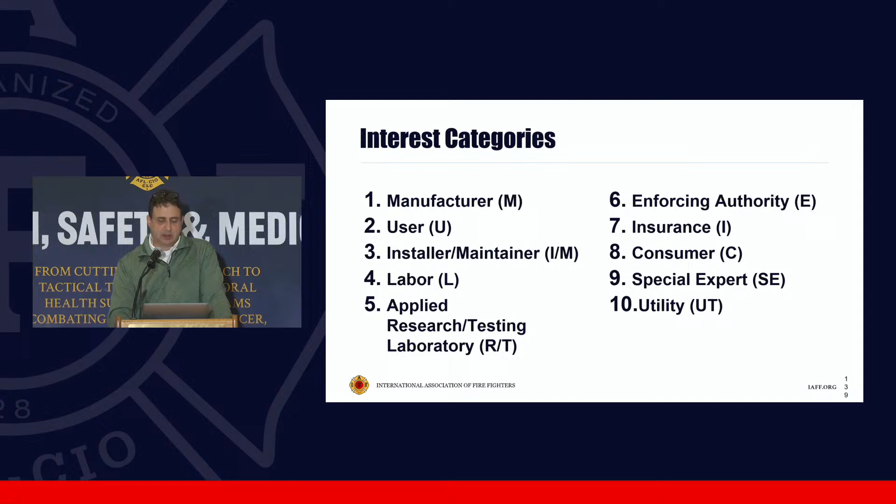So if you're applying to a committee, you probably want to look and see what interest category is underrepresented. When I got on respiratory, there were quite a few users on there, but there was only one other labor position. So I submitted as a labor spot, and I got moved up - I had to get sponsored by my local. But I was able to move up ahead of people who had submitted wanting to be on as users. So that's just something to know, and understanding that there is a wide range of interests on these committees.

When we're doing things right, when we're going through it, the NFPA process is a 4-step process: there's public input, public comment, the technical committee meeting or tech session, and then the Standards Council takes action. This is approximately a 2-year process, starting with the public input.

The public input opens up pretty soon after a standard is released, and from the public, you're able to go online and put a suggestion of what you want to see added to or changed within the standard. That's called the first draft, and development of the first draft.

The committee will have a first draft meeting roughly about 2 years before the standard's going to be issued. They're going to consider and provide responses to all public input. They may use the input to develop what's called a first revision - it's not necessarily an up or down decision. It could be that this is an interesting comment, but we think it should go this way or that way, and the committee could develop something completely new. Members of the committee may also bring new inputs not submitted as public input. So that's your last chance to get new material into the next edition.

The committee gets balloted on their first draft, and then the first draft report, after that passes, gets posted for the public to review. The public has generally about 6 months to a year to provide comment back.

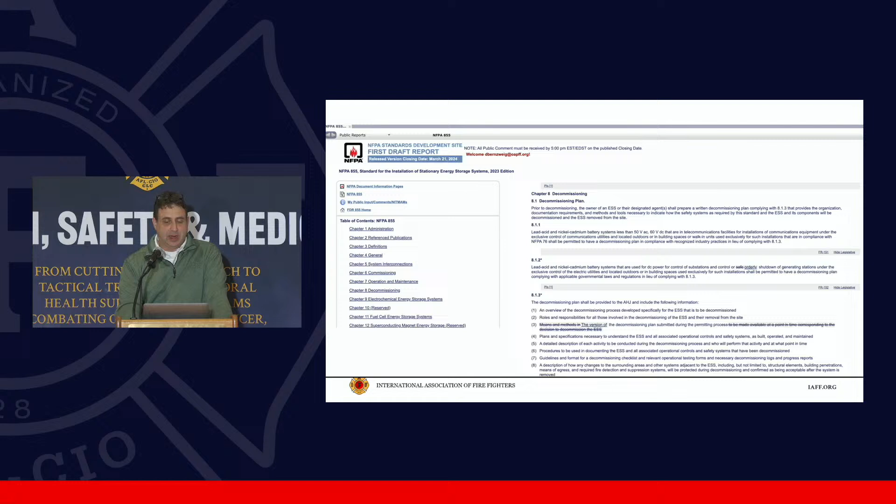And if you're doing a first revision, or a second revision, a public comment to it, either first or second, it'll open up a screen and you can type directly there. It'll show you legislatively what was added. You just click on a box and it'll open it up.

And in this case, something important to note is that in second revision, you don't actually see the changes that were made in the first revision. So this, I think, is a big shortfall of the system that NFPA has, is that you can look at the first draft and see the changes. If you're looking at second draft, it looks like the final document, so it's cleaner, but you don't see the legislative text anymore.

So you have to review the changes made in the first draft report, and then you go into the public comment and you make changes or comments there of what you want to add. When you submit it, it's going to show up in the document info page like that for you to see. This one I didn't submit, but I kind of showed you what it would look like if something's actually submitted.

Okay, and then just getting involved, right? Anybody can get involved in this process, and I strongly encourage it. You can get involved at any level. You can provide public input, you can provide public comment, you can submit what's called a temporary interim amendment. This requires the support of at least two other committee members, but you can say, hey, this is a critical safety issue that we can't wait until the next edition for.

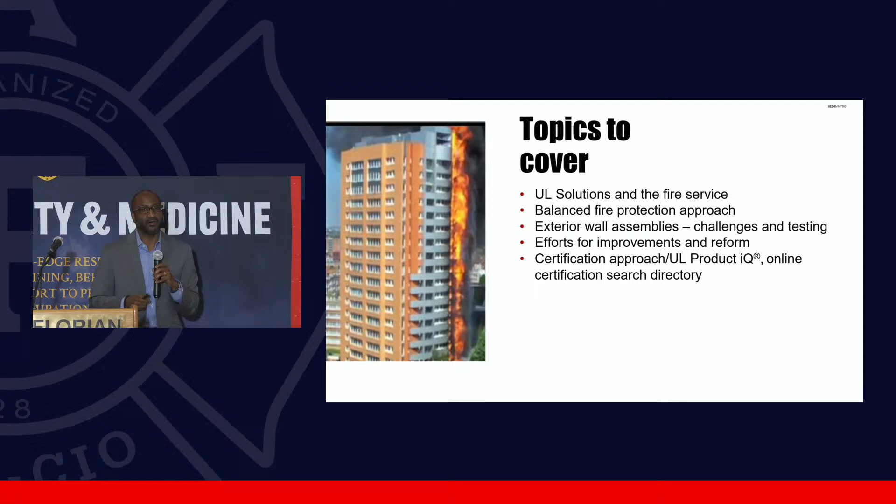Amanda earlier today talked about the certification, so we're going to go back to that and show you how you can actually see some of these products on UL's database.

But let me take you all the way back to 1894, where UL first got started. We actually got started with a very close attachment to the fire service, when William Henry Merrill was asked to investigate this rash of fires at the Columbian Exposition and to see why these fires were even happening. That's where we got our start.

With literally a few hundred dollars, he was up over the fire station in Chicago. And I'm going to say it, Flam - Sean DeCrane wants me to put Flam's picture on the wall here to simulate that he was there in 1894, but I said I would never do that to you, Flam, okay?

But yeah, so we were there in 1894. That's where you all got our start, and so it's great to be back here with the fire service.

Our original logo was this logo right here. It was a fireman's belt. That was before the UL in a circle that you know and see today. It's these Latin words, ignis servus non dominus - that's my best Latin - but it means fire is the servant and never should be the master. So that was our original motto and logo. It changed over time and became the UL with a circle around it. But it just kind of goes to show how our attachment was with the fire service.

You've also heard a lot about the three organizations. Adam Barowy was here and showed a lot of the different things they were doing on research, and you've also heard us talk about UL standards. I wanted to take a moment to share that we are three distinct organizations with three very distinct purposes, but we have one shared mission. We're all still one UL.

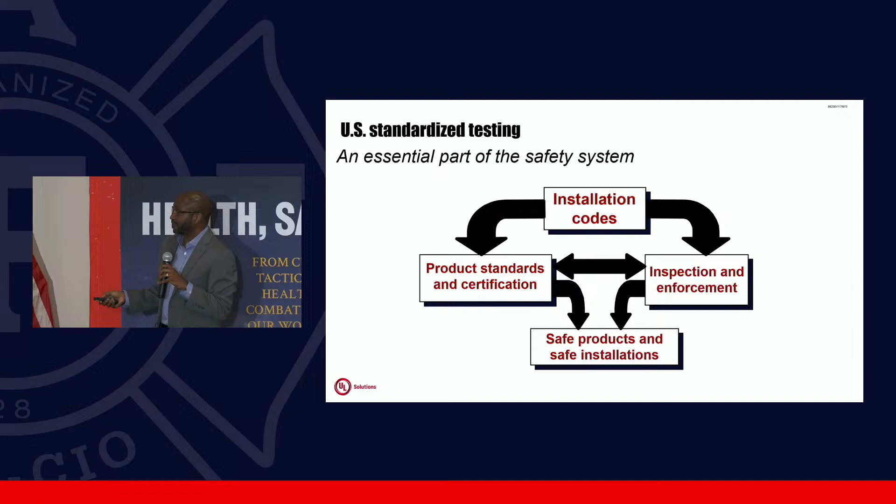When we talk about the systems, like David mentioned, the installation codes, or model codes, like the IBC International Building Code, International Fire Code, and NFPA 5000 — those are the model codes picked up by jurisdictions. But within them are the product standards and certifications, like UL standards and NFPA standards, all within those model codes. It's really important for us to get this right, because they get put into the installation codes, which are used for inspection and enforcement. That's how we get safe products in buildings — it all ties together.

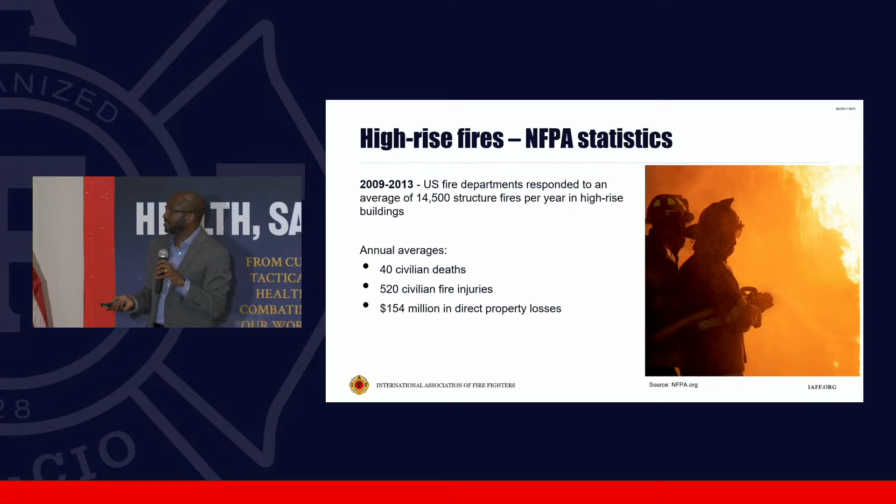When we talk about high-rise fires, one thing we see is that the stats for NFPA high-rise fires are still quite high. U.S. fire departments respond to an average of 14,500 structural fires per year in high-rise buildings. Any deaths are too high, but we still have 40 civilian deaths and 520 injuries associated with that, along with a lot of property loss. I wanted to show these stats to set the stage for why we still want to take a look at high-rise fires.

And these are the NFPA statistics relative to high-rise fires as well.

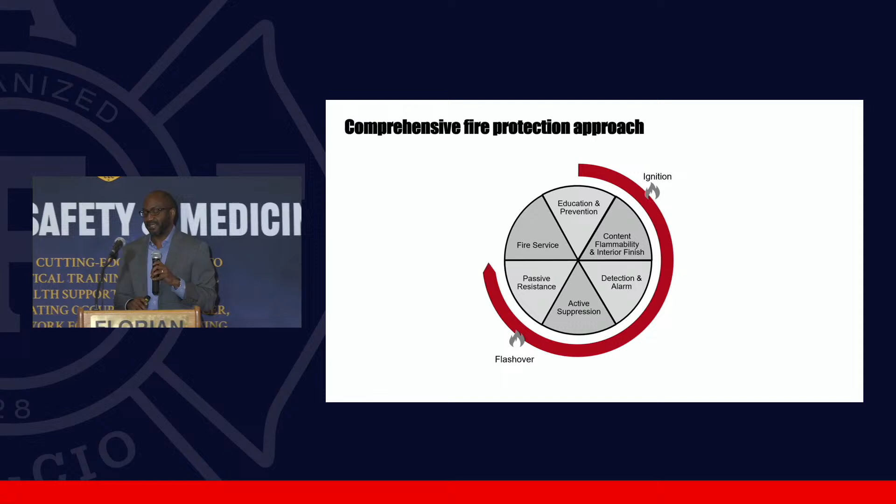We always love to look at our comprehensive fire protection approach. It's been touched on a couple of times yesterday and today — we'd love to educate and prevent fires from ever happening in the first place. As Sean says, a good day at the office is one where you never have to put the gear on and go out at all. I joke with friends that about 85% of the company at UL Solutions works with our customers to try to keep fires from ever happening, working on products in your homes so they're not a source of a fire to begin with.

But we know fires do happen — you can't keep that from happening. When fires happen, it starts from ignition, and you've got content flammability and interior finish — we call that reaction to fire. We want to keep the fire from spreading across the surface so fast that it can't be controlled. That's the first step in our fire protection world. In the lab, we test to understand that flammability aspect and how fast fire spreads across the surface of things — that's where we get into the exterior wall discussion.

We also want to detect and alarm so we can let someone know a fire is going on and get them to safety, out of harm's way. We have active suppression, where something has to activate in order to put out, extinguish, or suppress the fire — that's our active suppression area of business.

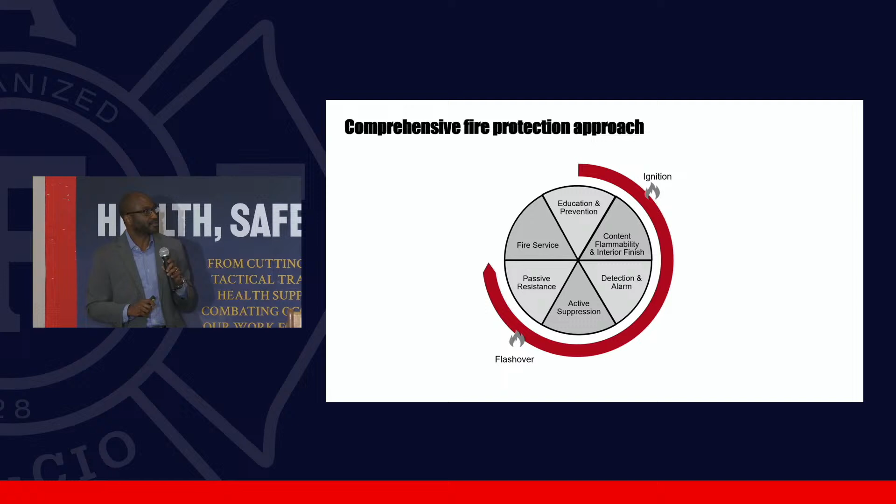But that has to be balanced with what we call passive protection — hourly rated walls, hourly rated horizontal assemblies, floor and wall assemblies, and fire stopping. All of that serves a passive purpose, so the room can sit there and you can have an area compartmentalizing the fire, keeping it in the room of origin. That's the other passive section.

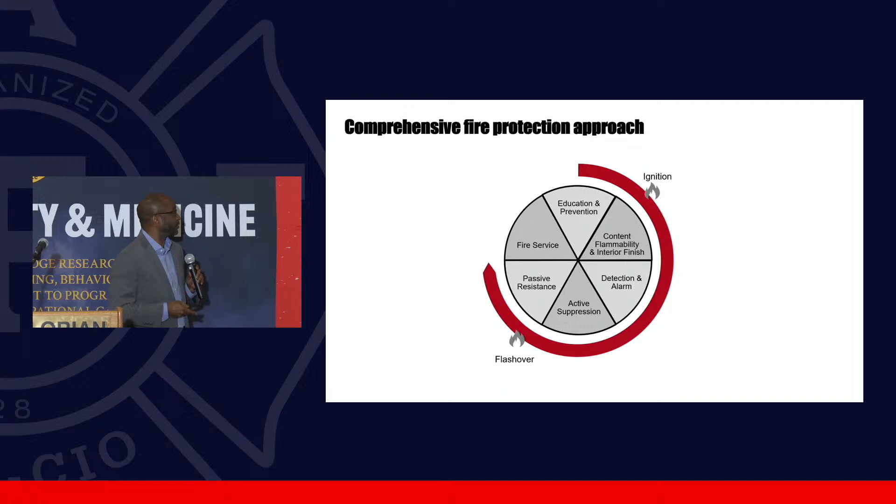And then, of course, we have our fire service, where you guys come out and deal with this. Hopefully, if all these things have worked well, your job becomes much easier. So we wanted to show you the comprehensive fire protection approach in the products that we test and list.

So with respect to exterior wall assembly, some of the challenges are, here's a lot of the different products that we see on the exterior of walls. We've got foam plastics, batt and blanket products, continuous insulation, metal composite panels like aluminum composite panels, EIFS systems, the exterior insulation finish systems. All these different things comprise the exterior wall, but one thing they have in common is that most of these materials are combustible materials.

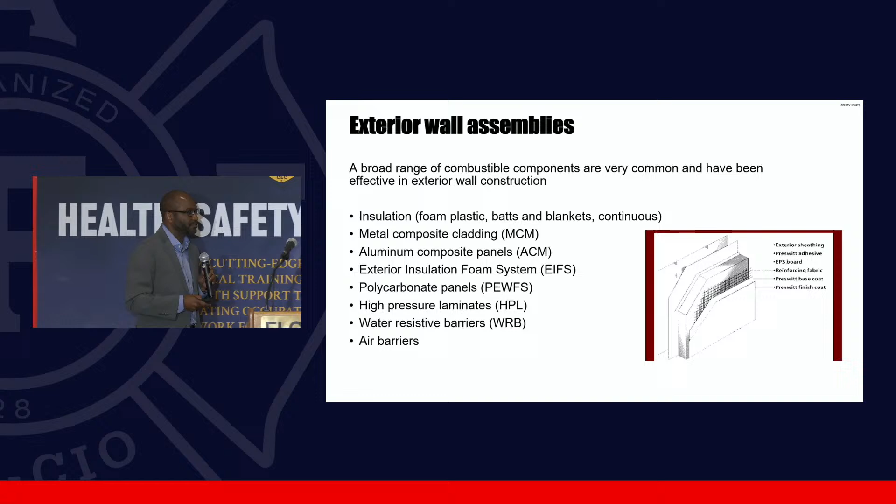And with that, you think about the area that we're in, where we want to have speed to construction, and we want to introduce new materials into the marketplace. So with this idea of introducing new products into the marketplace, there's this compounding effect of all of the various combinations that you can have for exterior wall construction.

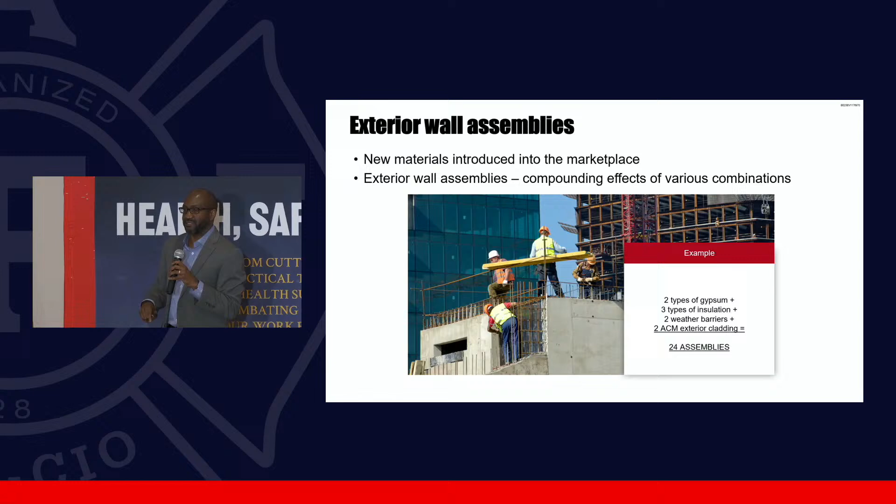So for instance, if you've got 2 types of gypsum board, 3 types of insulation, 2 different types of weather barriers, and a couple of different aluminum composite materials, you could have 24 different assemblies that would have to get tested as a combination. Because when we do this test, it's important to see that you test this as a combination, as an exterior wall full assembly. You don't just test one part of this. You don't just test the gypsum board, or the ACM by itself. You have to test it as a combination, as an assembly.

Think about how many of the codes that we just talked about, they're trying to increase the thermal resistivity of your walls in buildings. And in order to do that, a lot of times they call for higher R values. Well, with that higher R value, you have different uses and increased uses of thicknesses of insulation materials. So when that happens, a lot of times you're adding more combustibility to that wall design.

So what we find is that there's a delicate balance between the functionality of the building envelope performance - resistant to UV, no water penetration, no air penetration, and what have you - sustainable construction, and then balancing that with fire safety. So there's a lot of things happening in the code arena to strengthen building envelope performance, functionality performance, and sustainable construction. But sometimes that conversation is getting lost with the balance of the fire protection or fire safety that is also in the codes. So these manufacturers have to balance those 2 different things.

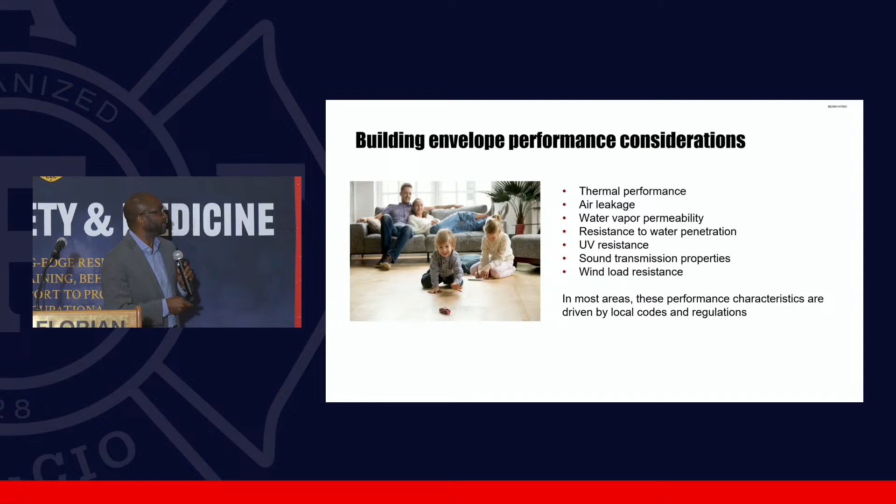An example of the building envelope performance considerations: things such as thermal performance, air leakage, water vapor permeability, resistance to water penetration. Who wants to be in a building that actually has water penetrating through? UV resistance, sound transmission, and wind load resistance. These are all the characteristics that a manufacturer of these products has to struggle with in order to meet these requirements in addition to the fire requirements.

We do testing. We actually acquired a company called Kleb up in Canada, and it's been really interesting to work with them because they have this huge jet engine that they turn on and spray water and wind against an assembly. We do what we call performance mock-up - we mock up a building and look at the moisture accumulation and things that would lead to sick buildings like mold. We control the air leakage and look at energy conservation to make sure water and air isn't getting where it doesn't need to get. They spend quite a bit of time, money, energy and resources managing their thermal, air leakage, and water infiltration. Again, that has to be balanced with fire protection.

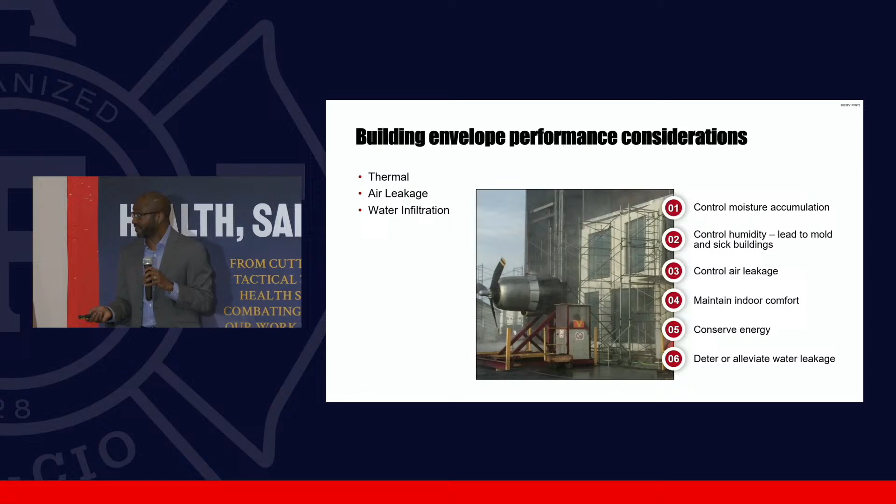We see things such as sustainable design, retrofit designs, which we're going to be talking about more today. We see building applied photovoltaics - I had many calls about what happens if I put a solar panel on the side of a building. Well, if you put a solar panel on the side of a building, that's something that can burn as well, so we want to investigate that. Once again, we talked about U factors and R values, increased insulation thickness, green facades with natural foliage - we see that of course is going to burn - and many of the decarbonization efforts happening in buildings.

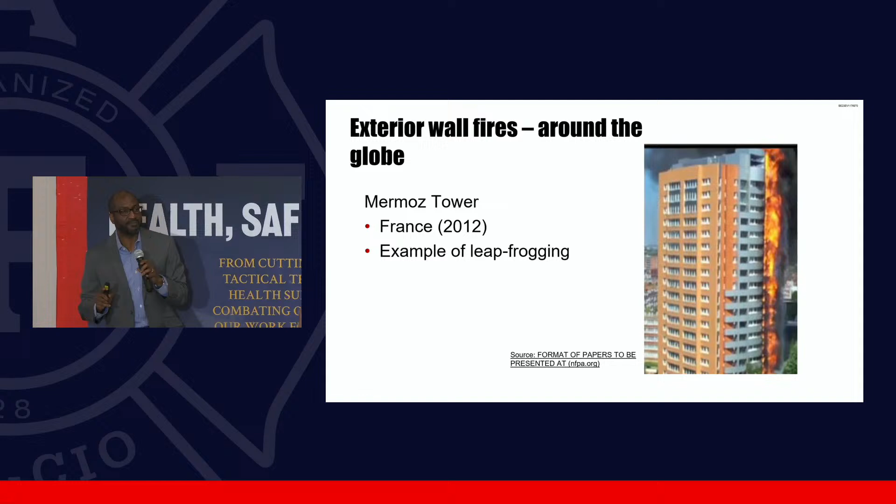So what's the problem? If you have a fire on the outside of these types of buildings, then the traditional things we know to work in the fire protection circle, that comprehensive fire protection approach, don't work on the outside of buildings. That's a problem. If you've got sprinkler systems, they're not going to work—they're on the inside of the building. That's not going to help a fire from spreading on the outside.

If you've got compartmentalization, where you have really good hourly resistive rated floors, ceilings, walls, and great fire stopping, that only works to keep the fire from moving through the building, but it doesn't help the fire from spreading up the building.

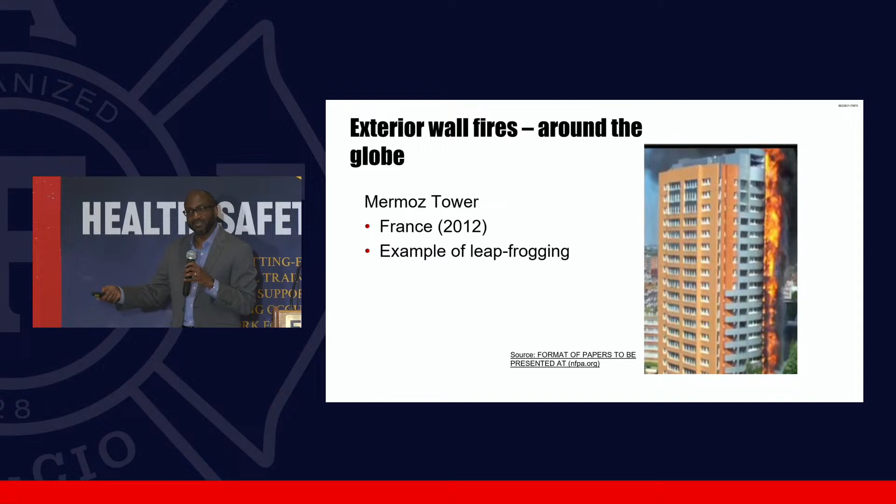So you have situations like the Mermoz Tower over in France. There's a perfect example of what we call leapfrogging, where the fire begins at the bottom floor and kind of leapfrogs up the panels. It breaks one window, goes back out, burns whatever is combustible on the outside, goes into another window, bursts outside, and gives you a straight stream to burn all the way up the building. We've seen this in many, many situations because the traditional fire protection approaches in the codes basically don't deal with these types of situations.

The Torch Tower over in Dubai burned in February of 2015. And while they were doing the retrofitting on the burn from 2015, it burned on the other side in August of 2017, and it's called the Torch Tower. So that's kind of ironic there, but yeah, it actually burned two times over in Dubai.

And then, of course, you got the Grenfell Tower, which happened in June of 2017. Many of you have heard about that because that was a loss of life with 72 people there. And it got a lot of attention to these exterior wall fires and these types of scenarios.

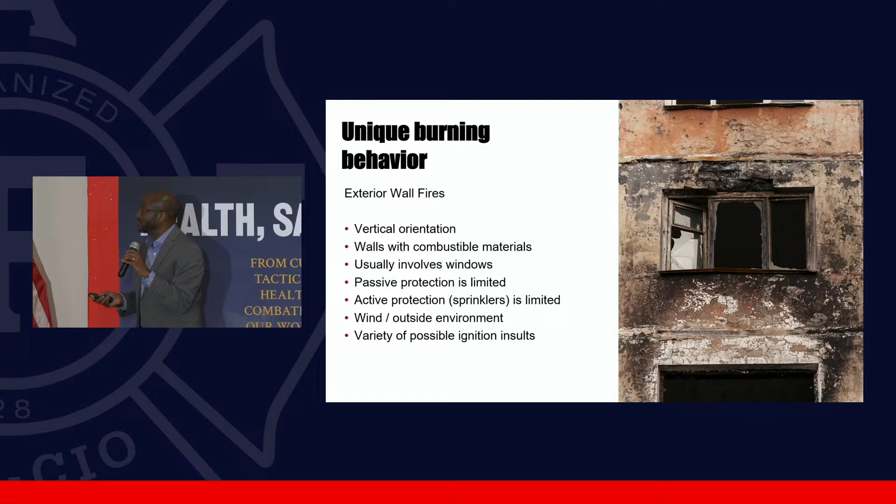If you look at the unique burning behavior of this, that's also another reason it's so hard to get under control. Of course, you've got the vertical nature of it—something that burns vertically is going to be different than something that burns horizontally. You also have all the different walls with combustible materials, all the different things that are getting used, usually involves windows, like the leapfrogging, bursting through the windows.

Passive protection is very limited in what it can do to stop this. Active protection, sprinklers, is limited. We've even had situations where they've tried to put sprinklers on the outside of the building, and you can imagine you're going to use up all of your water supply. That really has not ever worked. And in some of these situations, you've got wind that contributed to it being very difficult for the first responders to fight these fires.

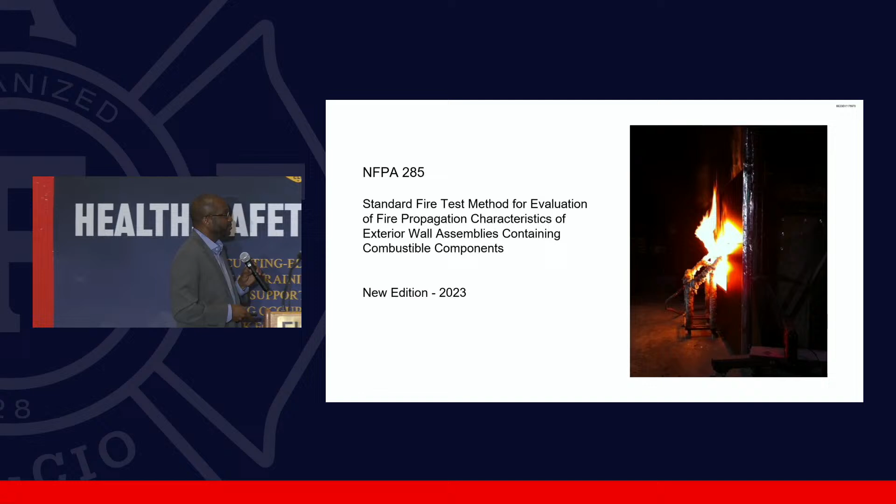So let me just pivot into the test that we do in order to deal with this type of occurrence. It's called NFPA 285. As David was saying, it's one of the many NFPA standards. I'm on the fire test committee for NFPA 285. We're now on the 2023 version of this standard. We recently went into the standard and put an annex in there to help us with engineering judgments and the judgments that can be made on the testing associated with this.

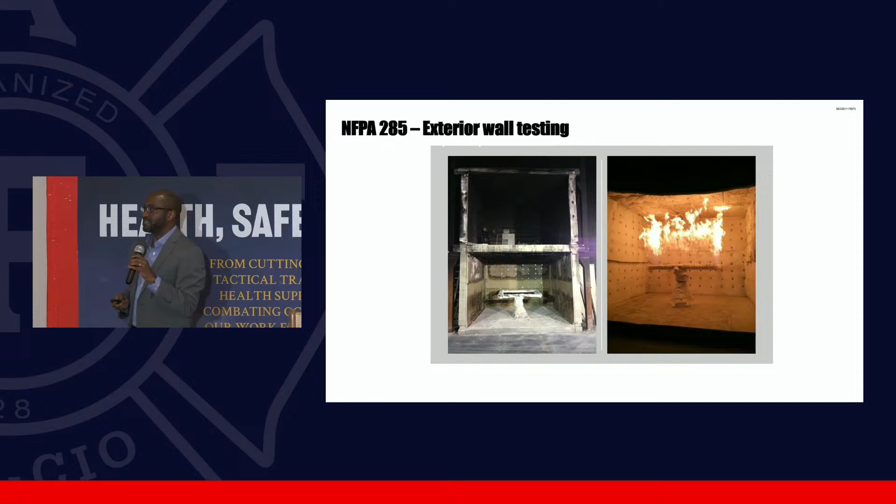We call it a multi-story intermediate test apparatus. It's a two-story apparatus. There's a burner on the first floor, and we ignite that burner, and it impinges on the inside of the wall assembly. We build the whole wall assembly in a frame and roll that wall assembly up to this two-story furnace chamber. Then at 5 minutes into the test, we roll up a window burner. You can see the window burner here, and we ignite that at 5 minutes into the 30-minute test.

Once the wall is put there—this is a masonry wall we're testing with all of its combustible materials behind it—you can kind of see here that we don't want it to go up the wall by 10 feet and not over by 5 feet from the center line of the burner. So you've got 10 feet up the wall and 5 feet either way from the center line of the burner, and that's the pass-fail criteria.

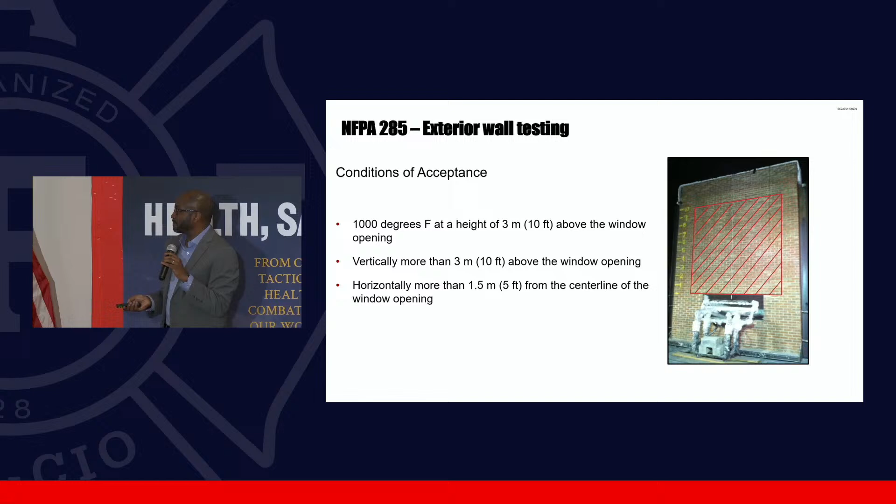So let's take a look at a test. We were able to work with a customer to bring in an assembly where the only change was the aluminum composite material and how it was constructed—whether that ACM was made with polyethylene in it or whether it had a limited combustible core. The inside of the wall was gypsum board, basically non-combustible continuous sheathing, and we did have a weather-resistive barrier in this one, and airspace. Again, the only real combustible component here was the ACM, the aluminum composite panel.

Usually we don't get to see this because, of course, manufacturers don't want to pay for tests that actually fail, right? So we were able to work with the manufacturer—we expected this would be a failure. At 5 minutes, we rolled up the window burner. You can see us igniting that window burner at 5 minutes, and you can see the ACM, the aluminum composite material, beginning to melt at about 6 minutes.

We had mineral wool on this one and gypsum board, and just a very small weather barrier and an airspace, so nothing else really to burn but the ACM. At about 9 minutes into the test, we started seeing things dripping from the ACM. We saw that the ACM outer skin was beginning to open up, and right at about 14 minutes into the test, we had already well exceeded the 10-foot requirement, and we were at the point where we had to put this thing out.

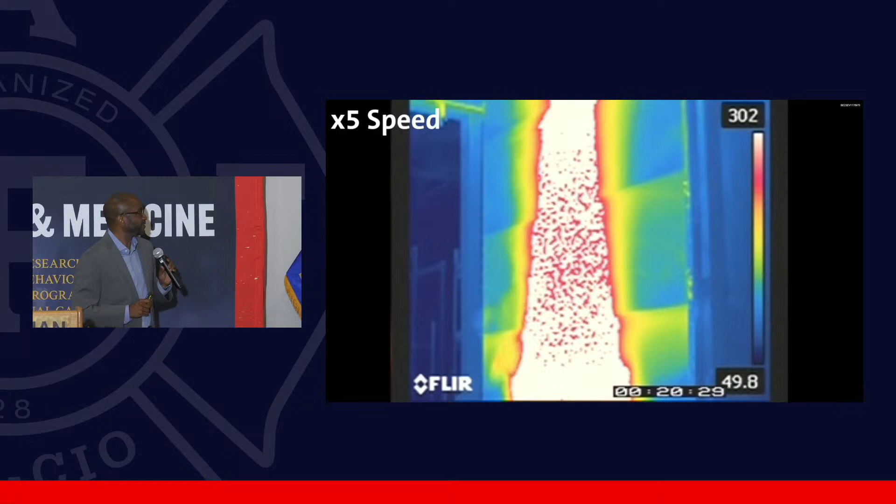Once we opened up the core, we didn't see the propagation of flames. Here we are at 20-something minutes into the test. It's starting to work its way up the wall, but it didn't actually exceed the 10-foot level. So here you go, 30 minutes into the test, this is what we would see as a passing test. Yes, it did open up, it has that triangular shaped flame pattern, but it didn't go to the 10-foot level.

We'll share some important things about this particular test. We actually did this test twice. The first time we did this test, the one that was supposed to pass actually failed. I called Sean up, I was like, oh my gosh, what's happening here? And it was a workmanship issue. They actually put this together, but even in a laboratory type of condition, realizing we were going to do it for this purpose, the workmanship problem actually caused this to fail the first time, and they came back and did it, quote unquote, right. But it just goes to show that even in a laboratory condition, just something as simple as a mistake in workmanship actually made the difference between a pass or a fail on this test.

So this test, you can actually see it on the IAFF site as well as on YouTube. You can take a look at the whole deal, it actually shows it in greater detail. I certainly invite you guys to take a look, just plug in NFPA 285 on YouTube, and you'll see us there, myself and Sean, going through this work that IAFF was able to sponsor for us.

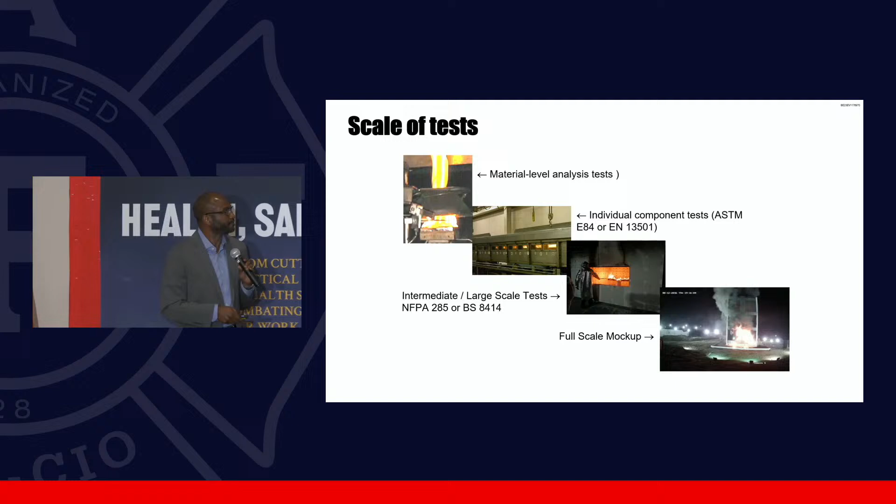So let's go back to our question. For the Dubai fire at the address, I asked the question: do we think that ACM panel was rated or not? By a show of hands, how many people think that ACM panel had a rating on it? How many people think it wasn't rated, that it did not have a fire rating? Got a couple hands, okay. So the answer is that panel actually had a fire rating.

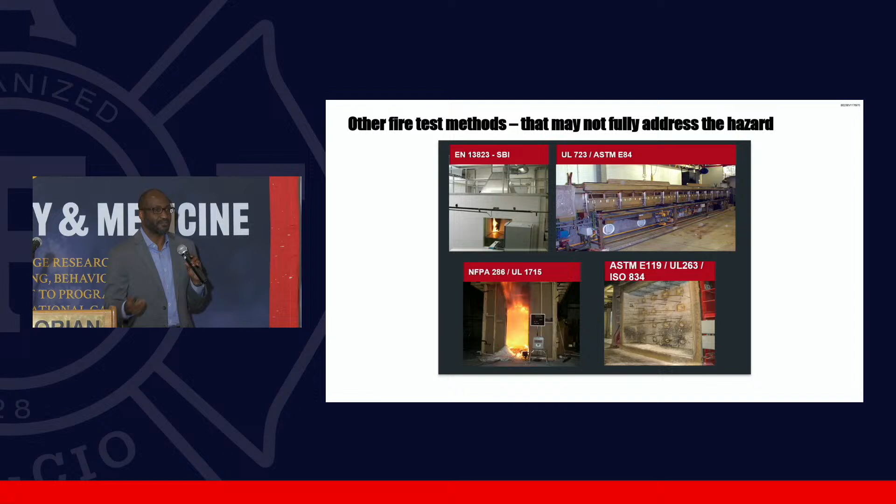The ACM product had a fire rating, and here's what it had: an ASTM E119 fire rating, and this has everything to do with your hourly resistive rated walls. So imagine putting two layers of gypsum board and some other things together, and putting ACM panels on the outside. This is an interior wall. This subjects the product from the interior side, and as long as you don't exceed a temperature requirement on the other side, you can pass.

So the ACM had been used in a compliant fire resistive wall assembly. It got like a 1 hour or 2 hour rating, but unfortunately that was not the right test to do. This NFPA 285 test basically subjects the wall to an exterior flame and watches the flame go up the outside - that was the proper test. So it goes to show you that a product can have a fire rating, but it needs to be the right fire rating. This product did have a fire rating, but not necessarily from the right test.

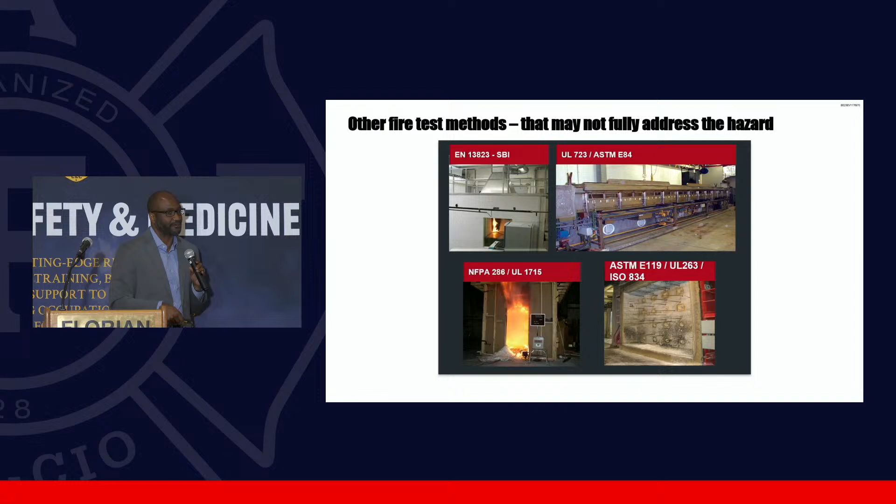Other tests that kind of get confused: we have a single burning item test used in Europe, ASTM E84, UL 723 with the Steiner tunnel. Sometimes that gets confused with a fire test because you do get a fire rating out of it. There's something called a room corner test that sometimes gets a fire rating too. But again, I just want to drive the point home that you have to have the right test in order to do that.

That would be like a whole half-hour discussion, but George is asking: is the UK test more restrictive or more severe than the NFPA 285 test based upon the fire source? The answer is that one way to look at it is yes, the actual fire source itself has a higher energy. But there are some other details in that test that are less severe than NFPA 285, so it's a bit of a balance.

You can't necessarily just look at the fire source because, for instance, on this particular test you're not exposing the interior - you're actually building on top of an assembly, and then the fire just comes out of a hole. We've actually gone into a deeper dive on a lot of these to show that while even the fire source might be different, there are parts of NFPA 285 with how you instrument it that actually make it more severe as well.

My understanding is that the Grenfell situation - it should have been tested to this standard, and that's what the Grenfell inquiry was all about: doing a deep dive to determine whether those products that actually got installed on the building were or were not actually tested per the reports. All of that information is in the Grenfell inquiry. Very good, good question, thank you for that.

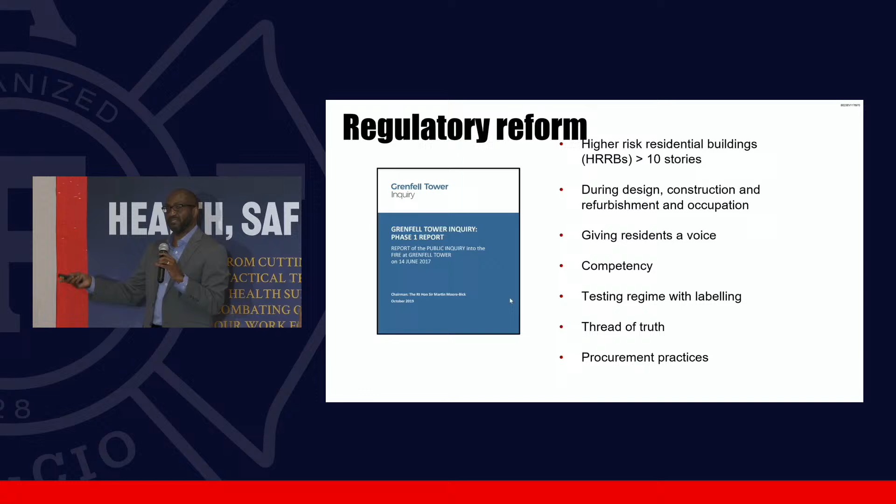I wouldn't want to finish this up unless I talked about the fire blocking in New York City. New York City has some newer rules that say even though you might have an NFPA 285 compliant design, they want to see fire blocking at certain intervals. That has already gone into play. The whole idea is to deter this leapfrogging that we saw earlier. So even if you have an NFPA 285 compliant design, NYC has now made regulations and laws to say that you actually have to have fire blocking installed.

So how do I know whether or not something has been evaluated to one of these standards, especially like NFPA 285? Well, we use our third-party certification. Rather than just do the test and give that sponsor a report that they have to show around to people, we constructed a certification program that allows you to actually see these assemblies as they're all put together. It's on something called Product IQ, and that goes for PPE gear, anything that would have a listing mark on it.

It's accessible all the time. You just go in there, put your name in there, it will remember you, and for anybody in this room, you'll actually be able to get the enhanced versions of Product IQ because of your role as a first responder. So just pop in there and put a keyword into the search field. If you put in NFPA 285 or what have you, it's going to pull up our categories for exterior wall systems and exterior wall system components.

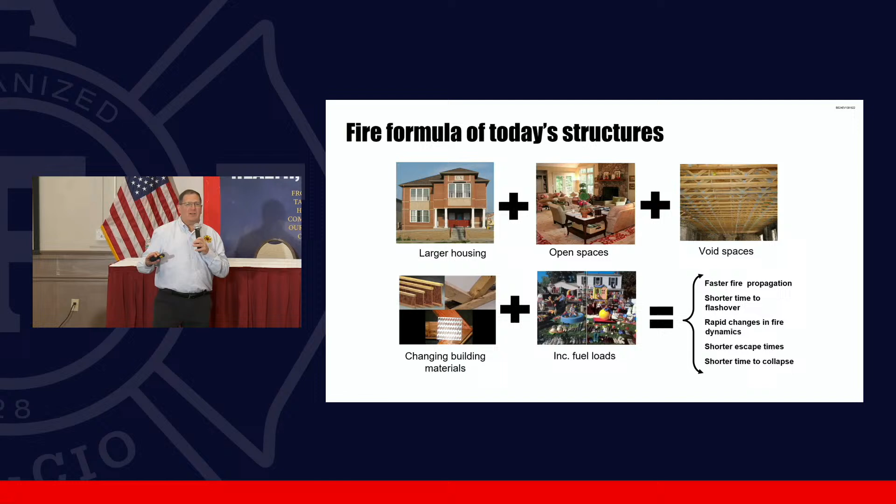So there's not a solid wall on that first floor. It's wide open, right, for that social aspect. We want people to be able to engage each other. But what that does is it creates openings, that open air, that access to oxygen. We lose that natural compartmentation we had in our residential homes.

We see the void spaces, especially with truss construction. Instead of having that inherent fire barrier above the ceiling area with the 2x12s or the 2x10s, now we have that wide open air. The fire can propagate across the floor.

And then we see, as I just mentioned, the truss construction. We see the changing materials, the engineered I-joists. We're seeing plastic components come to the marketplace. And I referenced it earlier, changing the residential code to require engineered floor systems to be protected with half-inch gypsum board. We were successful in doing that in 2012, but it took the life of Arnie Wolff from Green Bay, Wisconsin, and the research from UL and FSRI. And then the increased fuel loads.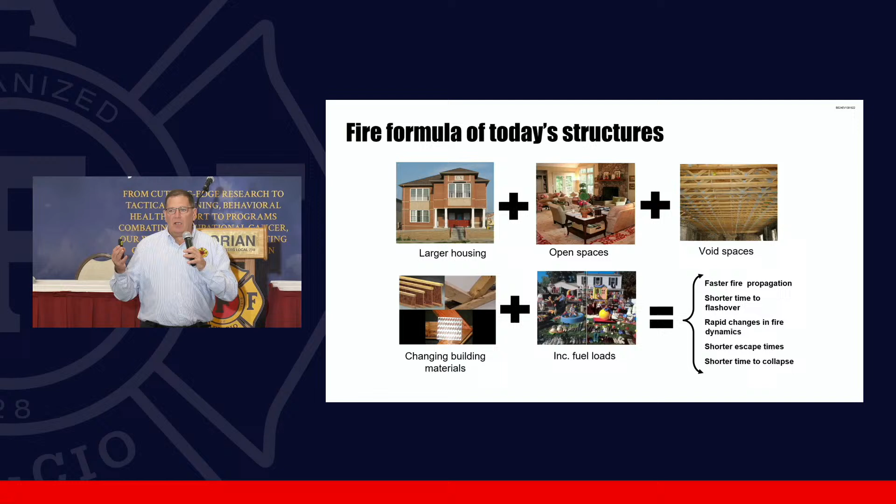So when you look at that picture there, that's actually out of a National Geographic from 1997. What they did is they asked a family to bring all of the plastics out of their home and put it in the front yard. A sales rep from Step 2 will be driving by looking at market share, right? We're looking at the fuel load. That's all petroleum-based products. And if you think about the synthetics of today's couches, the chairs, the furniture, we're just seeing that petroleum enter into the marketplace.

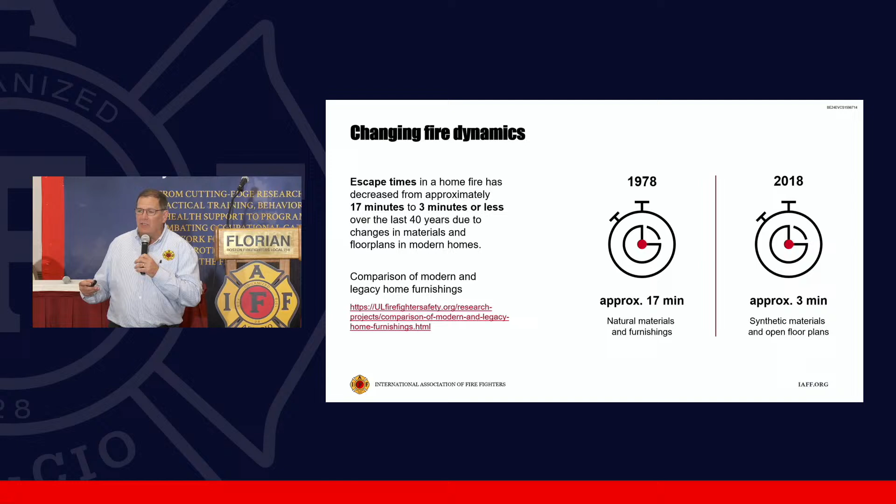And what impact does that have on our occupants? Back in the 1980s, the National Institute of Standards and Technology's predecessor did a study called the Dunes study, looking at the performance of smoke alarms and the time to escape, going back to the 70s. What they had calculated at that time is that when the smoke alarm activated, the occupant had approximately 17 minutes to effect egress before conditions became untenable.

In the 2000s, NIST went and replicated that study. The only thing they changed was the furniture. And that 17 minutes for egress time is now approximately 3 minutes. A lot of that depends on ventilation and the amount of air that's available.

And we look at the comparisons here. You may have seen this previously. Oh, I thought this went up to full screen - it does not. But on the left, you see that natural room. That is your solid wood framing, your natural fibers, your natural fabric covering the furniture. In fact, when this furniture started to wear down, what did Grandma do? Went and got it reupholstered, right? But it didn't wear down because she usually had that plastic covering over it, but we didn't cover it here.

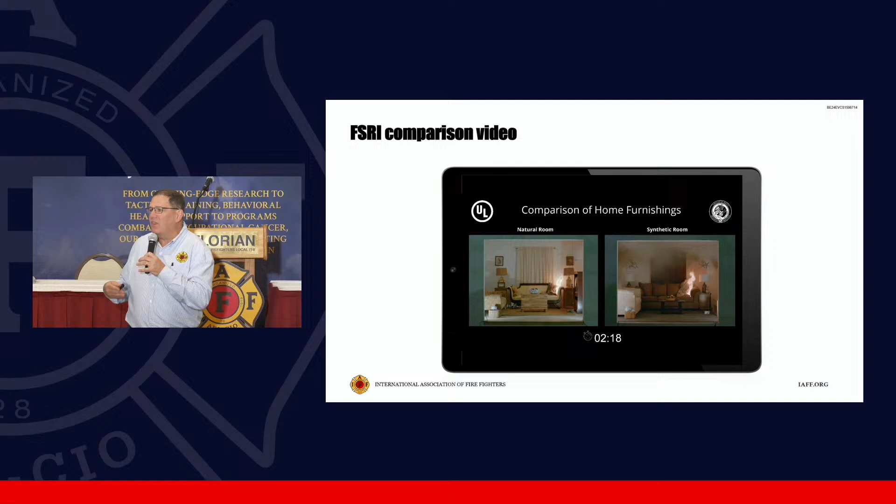So on the right, we have more modern furniture. It's synthetic-based furniture - polyurethane foam, pressboard construction on the framing, and synthetic coverings. This also has flame retardants in it, because we bought it off the shelf. So you see the difference.

At first, you had kind of an open flame on that natural fiber, but that was because it was fully consuming that fiber as it's going. But once that fire gets going on the right, it's hard to see there, but what's the main byproduct that it's producing? Smoke, thick black smoke, because it's not perfect combustion. Incomplete combustion creates carbon monoxide, carbon dioxide.

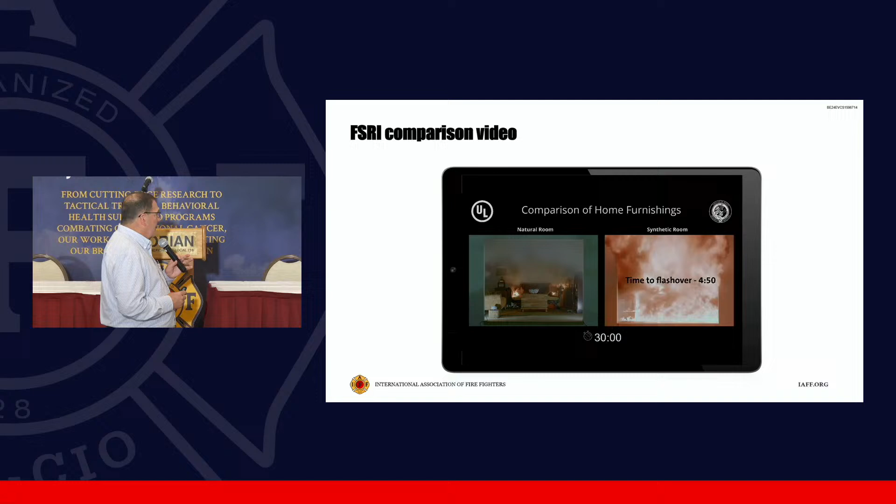Now we see that it's preheating, and now we transition to flashover. Depending on the opening of that room, we can see flashover from 4 to 5 minutes or later, depending on controlling the airflow. On that left, natural fiber room, sometimes depending on that ventilation opening, if it's wider, it may not flash at all because all of the heat is able to dissipate.

And if you think about the construction of that typical residential occupancy now, on that first floor, wide open, unprotected stairs to the second floor - that means if an occupant has any delay in responding to that smoke alarm, and is not out of the house when our members arrive, it now becomes a life safety issue, it becomes a rescue. So it puts our members at greater risk as well. This is a firefighter safety issue as well as an occupant safety issue.

And we've seen some modifications that really enhance what we were trying to do from a fire service perspective. You look at UL 217 and 268, that's the smoke alarm and smoke detector standards. We're incorporating through the NFPA 72 standard the requirement to reduce cooking nuisance alarms, identifying wanted cooking versus unwanted cooking. So really a lot of research went into that.

And also we've seen the introduction to the emergency communication systems, and we got this into the codes. Bob was very instrumental in that after 9/11. With the failures of our communication systems there, I still think it's one of the most important advances. The code now requires that our communication systems work effectively in 95% of that structure. And now we have the code requirements to go in there and require the building owners to update their system. Joe Brooks here from Boston has used that very, very effectively in the Boston area to ensure that communications are operational, especially in high-rise buildings.

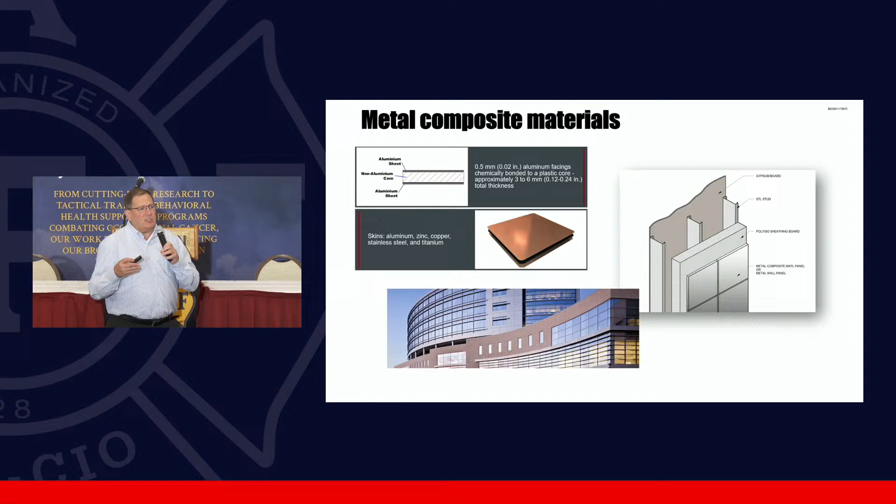But it's also the importance of standards, and test standards. Dwayne covered the NFPA 285, looking at preventing the fire propagation from an interior fire reaching that exterior wall and then propagating up the side of the structure. So Dwayne kind of went over what those ACM panels are. Really, I just wanted to give a sample of it here. You kind of look at it there.

The important thing is that sometimes people are lulled into a false sense of security. They see those two panels of metal and they go, this is non-combustible, this isn't going to catch fire, the fire is not going to propagate. But what's the problem with that theory? They're not counting on the penetration or the failure of that seal around that panel. And if that panel is containing a combustible plastic, as it starts to melt, as it starts to come out from between those two panels, it becomes a fuel load. And it becomes a very effective fuel load at communicating up the side of the structure.

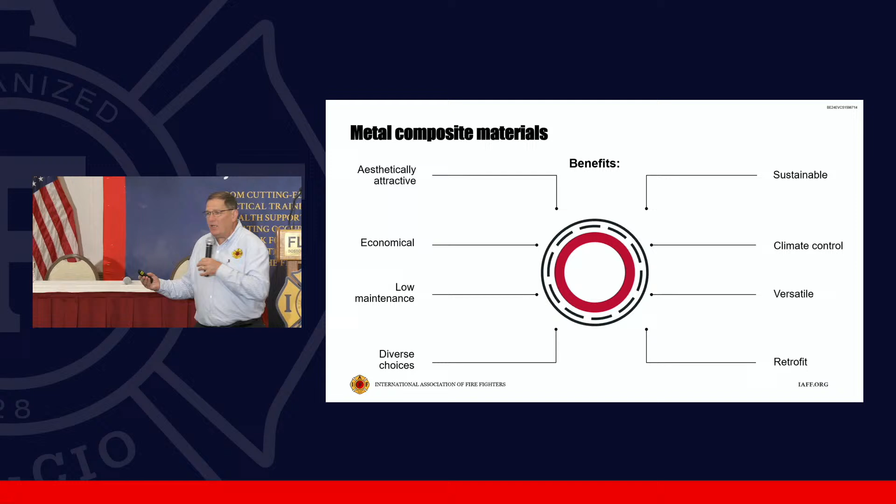And so industry, and we find this a lot, industry has their focus, and I'm not trying to make them a bad guy, but they have their desires to bring aesthetics to it. We have designers out there, architects that are designing beautiful structures. Now industry wants to meet the challenges of meeting that aesthetic look. They want to be economical, so they win the bid. They want to be low maintenance, especially if you're a high-rise building. How many times do you want to put a crew on the outside repairing it or cleaning it? They want the diversity of choice. We don't want every building to look the same. We need individuality, we need sustainability. We want to meet the energy performances, climate control, cooling in the summer, heating in the winter, and versatility, and also the important retrofit, just like Grenfell was, just like a number of buildings have been.

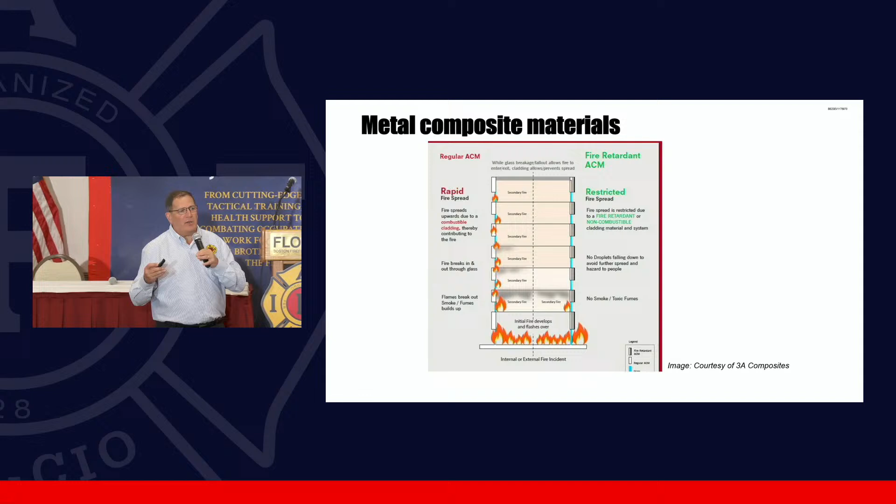What's the one component that they're not thinking about here? Fire, right? And we see this in the residential, and Kelly's going to get into the testing that we did in the residential looking at this, because this is what DOE did not do. They were looking at the energy performance, but they were not looking at the fire risk. And so if you look at a regular ACM panel, it may have a polyiso foam or a polyurethane foam, the risk of fire propagation is increased exponentially versus, I know it says fire retardant, but it doesn't have to include fire retardants. It can be a non-combustible interior of that panel, but really what it's there to do is designed to limit the spread of fire.

So since we're talking about combustible exteriors, let me go there. Tall timber buildings. So this is an issue that we were addressing. I was put on an ad hoc committee through the International Code Council. The American Wood Council had introduced code change proposals trying to increase the permittable height and area of a type 4 structure, heavy timber. They wanted to go from 6 stories to 9 stories.

We're at the late stages of the code change development process when the fire service was like, hey, wait a minute, what are you trying to accomplish? And their sole argument is, we're going to reduce the impact of wildfires by putting up taller wood structures. But they had no justification, they had no data to demonstrate that they could do this effectively or safely. So they established an ad hoc committee. Long story short, we got together, did some fire testing.

A lot of people were trying to push for 40 stories. The fire service, because of our involvement, we are now limited to 18 stories, but this isn't necessarily accurate because the book wasn't even printed, and Milwaukee already has built a 26-story wood structure. So that's a whole different presentation.

But Grenfell happened during our deliberations, and one of the most important aspects that came out of that was that as the committee went forward, we put forward changes that would not permit any combustible materials on the exterior facade above 40 feet in a mass timber structure.

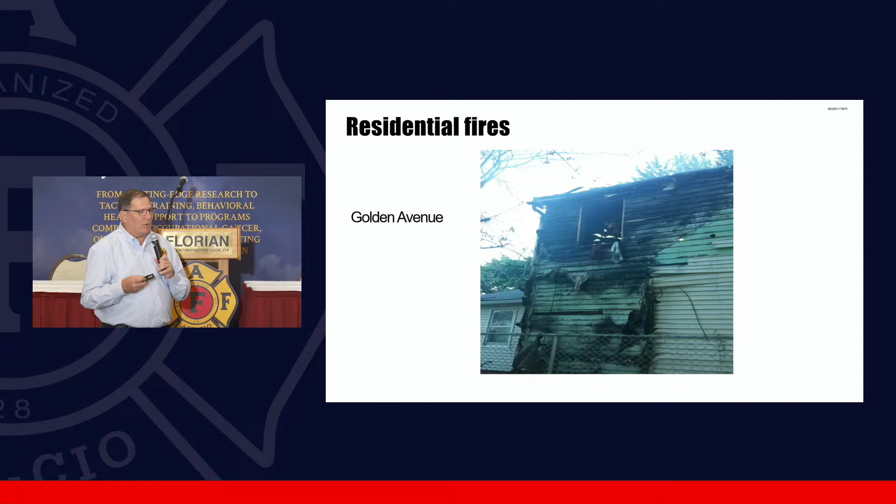And the only reason this fire did not propagate to the house next door is because the house next door was already gone, right? So that's how quickly that fire propagated up and down that house. So these fires do have consequences, and we do need to be cognizant of it, because as Kelly's going to get into, it's...

When we start to retrofit, we're not only looking at retrofitting that house, we have to look at the impact at surrounding structures. And this is a house that's in Brunswick, Ohio, or apartment building in Brunswick, Ohio. And this is about 15 miles outside of Cleveland.

And this fire started on the exterior, went up the side of the structure. Mother and father got out of the apartment, but apparently forgot their 2-year-old inside the apartment. The 2-year-old did not make it.

When the assistant chief arrived on scene, he was interviewed by the media, and he made a comment. He goes, the fire raced up the side of the building like it was on gasoline. The next day, he got a phone call from an industry rep that just said, Chief, you should watch what you say in the media. It could get you sued.

They never asked how the family was doing. They never asked how his firefighters were doing. They never asked how the community was doing. They were worried about a comment made about their product. So these are the challenges that we have sometimes.

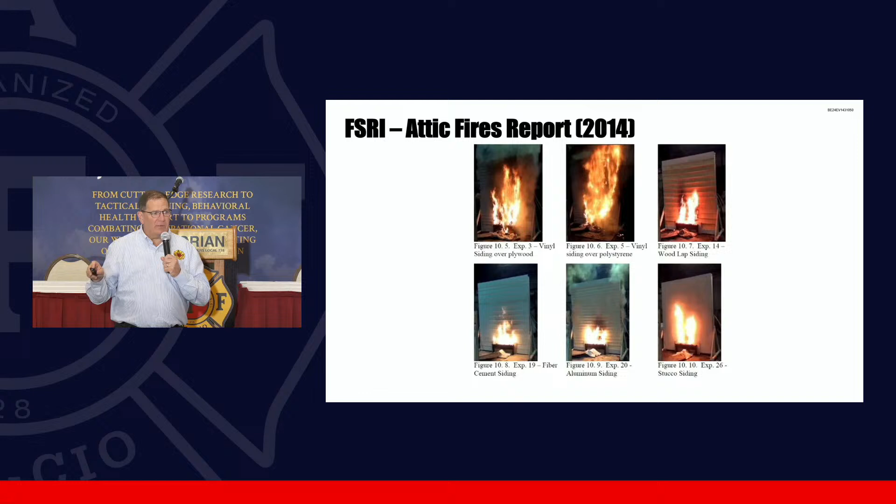The important thing out of this project that we have to take forward is that it's great to have that attic fire, and we all do it. We get that moth to the flame, right? Get through the door, get up the stairs, start getting water on that attic. We also have to be cognizant of that exterior fire that's pushing it. We've lost firefighters recently in Tennessee because they did not address the exterior fire that was driving the interior fire down on them.

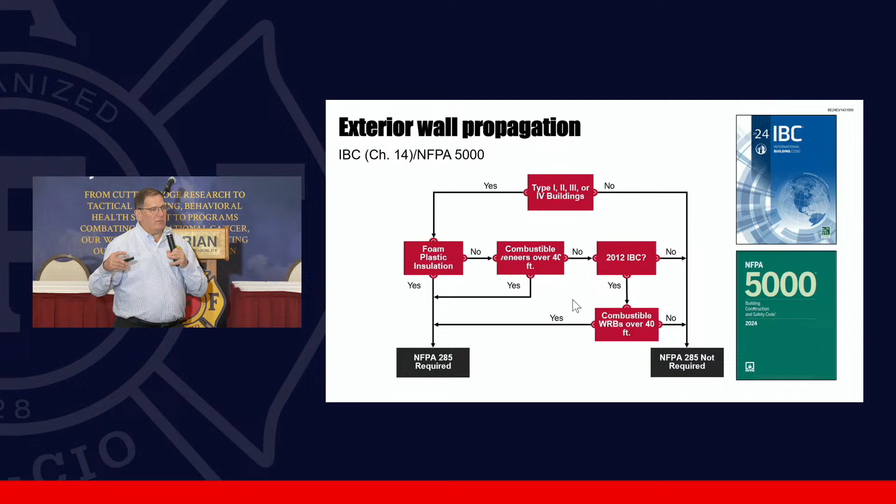What we're looking at here with this project are buildings that are not subjected to NFPA 285 testing. Just in the scope of NFPA 285, you see that type 1, 2, 3, or 4. You don't see type 5 involved. If you go through the whole flow chart, you can see buildings over 40 feet have an NFPA 285 requirement. But residential, type 5, 3 stories, are not subjected to NFPA 285. So if companies or building owners want to retrofit their building to make it more energy efficient, they don't have to do any fire testing to evaluate the performance of that exterior system.

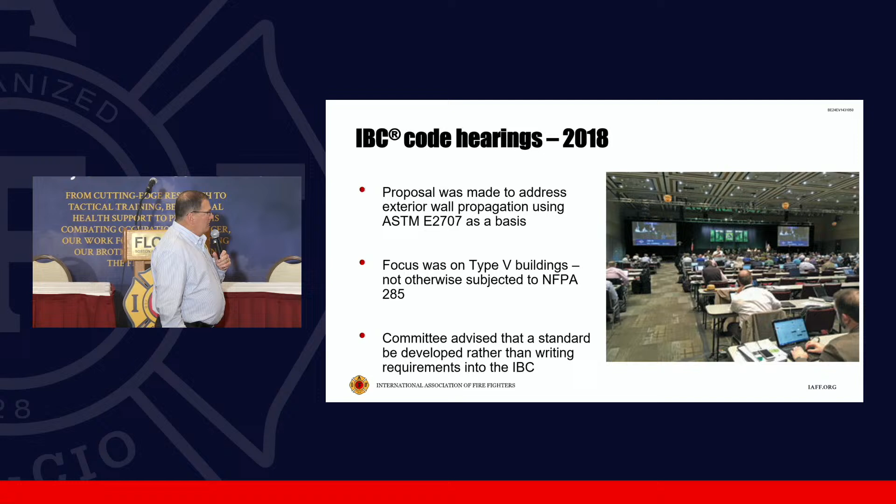So what kind of drove this after that 2014 project - there were some in the industry that wanted to change that. They were trying to take the test and accompany it with ASTM 2707 and write a test standard right there in the code world, which is not a very good or pretty process, and usually not a very successful one. But it really started things going. There's a picture from an ICC meeting - I think that day they were giving away free beer, because usually you don't have that many people in the room. But really what this brought up is the need to start addressing this from a test standard development.

What is the ASTM 2707? Well, it's a wall penetration test. I don't think Wayne talked about it at all, but really it's evaluating the fire penetrating through that exterior wall. So we were saying, can we take this and modify it? Can we put it into a fire propagation test? There was an industry that came to UL and started to do some research - could they develop this? They have a non-combustible product, also an insulation product that can go on the exterior walls, and they wanted to see if we could develop a test standard applicable to those residential walls.

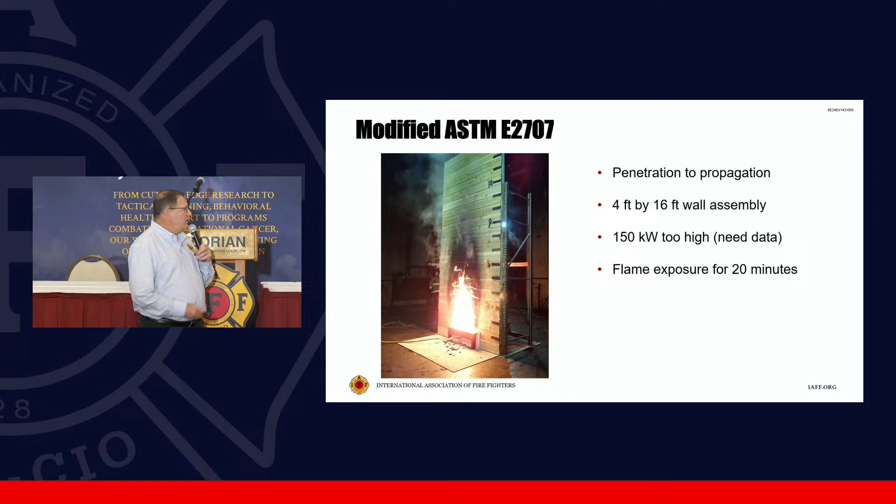This was going right into COVID, but they were looking at taking the penetration test to the propagation test. It's a 4 by 16 foot wall, and there were a lot of considerations: how size should the wall sample be, what should be the flame exposure - should it be 50 kilowatts, 75, 100, 150? How long should the application of the flame be on that wall sample? Do you have an observation period, do you turn off the flame and then observe for a period of time? Should there be a pass-fail criteria? Where should the thermocouples go? So there were a lot of questions going into it.

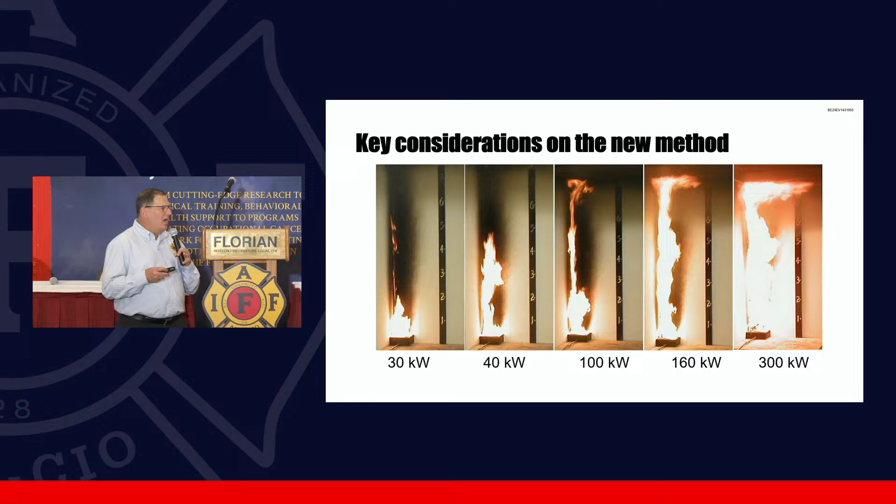Unfortunately, we didn't come out of that project with any definitive answers, but it gave us a lot of information for going forward. Just as a sample, I want to show you what the size of that flame looks like. So from left to right, you have 30 kilowatts of exposure, 40, 100, 160, and 300. That really is just the amount of energy you're applying to that exterior wall, and then you're measuring what the impact of that exposure would be.

That's like a large plastic garbage can catching on fire. But you have to find that balance, where industry can be successful, and our realization of what that risk-benefit or risk value should be, how often is it going to occur, and the consequence of that failure. Because we're not going to be building everything like Flintstones, and we have to recognize that.

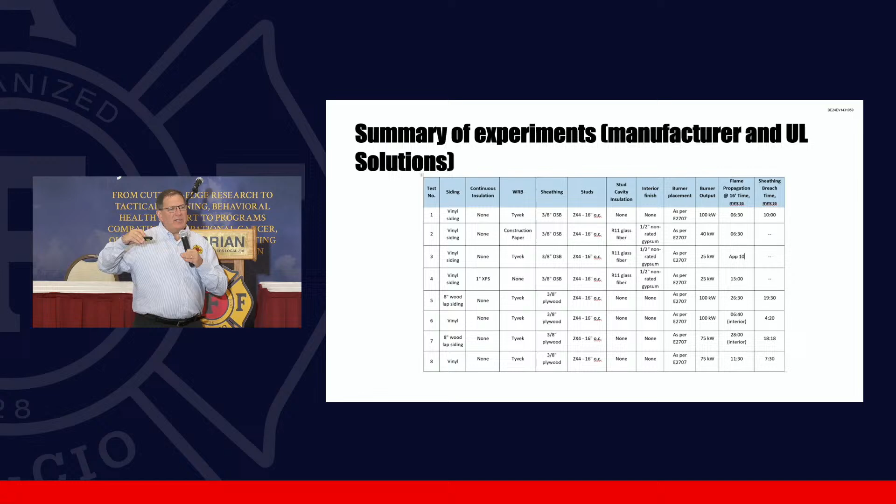What we have to do, as it's been said a couple times today, is as you're in that engagement—Dave mentioned it—where is that balance we can meet industry at, that we can evaluate that performance and ensure that performance provides safety to the occupant and to our members. So that leads us into what Kelly's going to present on and how DOE approached us.

They had invested a significant amount of money with Pacific Northwest Laboratories looking at designing exterior energy performing wall systems, with the intent of post-construction installation—modifying 1 and 2 family homes, but also multifamily homes. What they were having problems with was having these designs accepted because of fire. We actually sat as a group and said, oh, that'll burn, that'll burn, that'll be okay. But really, what we're trying to do is not evaluate each individual system and its performance, but find a pathway forward where you can meet multiple design criteria, with performance as what we're measuring you on. So with that, I'll turn it over to Kelly.

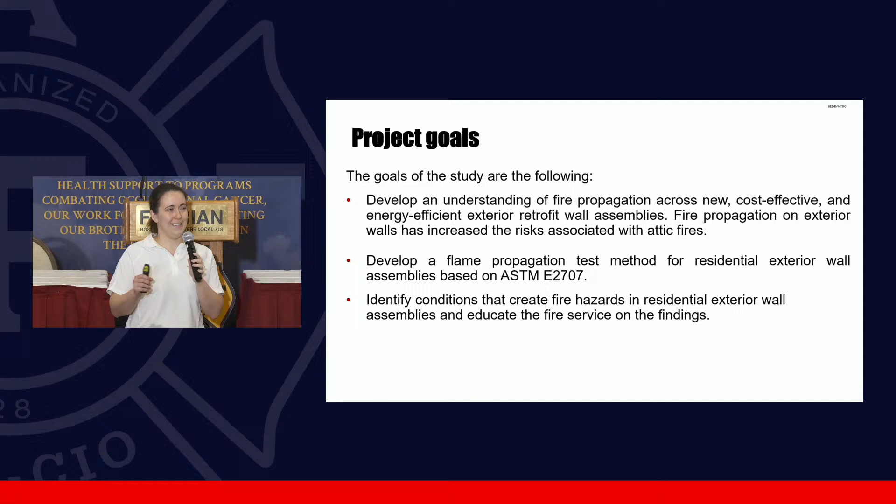So with that, I will go over the results from the DOE funded project. We did testing on a number of energy efficient wall designs that led the way to revisions and hopefully creation of a new ASTM method. The project goals here: one was to look at flame propagation, and to develop new, cost-effective, energy-efficient residential retrofit wall assemblies. We'll get into more of how that plays into the testing method development.

The other part of this is to collect data to revise the draft test method that ASTM had started as a result of FSRI's attic fire testing. Lastly, we wanted to dig into which of these features in these wall assemblies could potentially be hazardous, and what that means for the fire service.

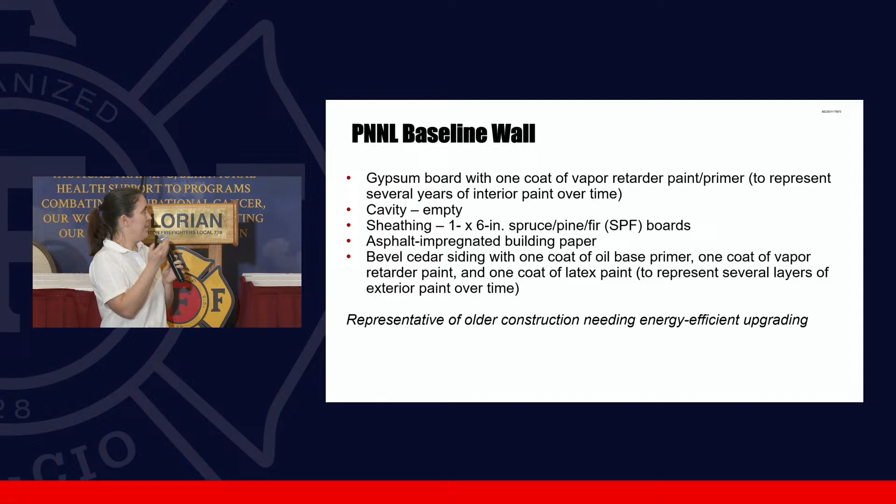So to give a little bit of background, PNNL, Pacific Northwest National Labs, did a 3-year study specifically looking at how to make older homes more energy efficient. As part of that, they went through and looked at current practices, emerging practices, and new technologies. They did a very in-depth study—it's a good read. As Sean said, the exception is they didn't factor in fire performance. So when we talk about the baseline wall and where that came from, it came from this PNNL study.

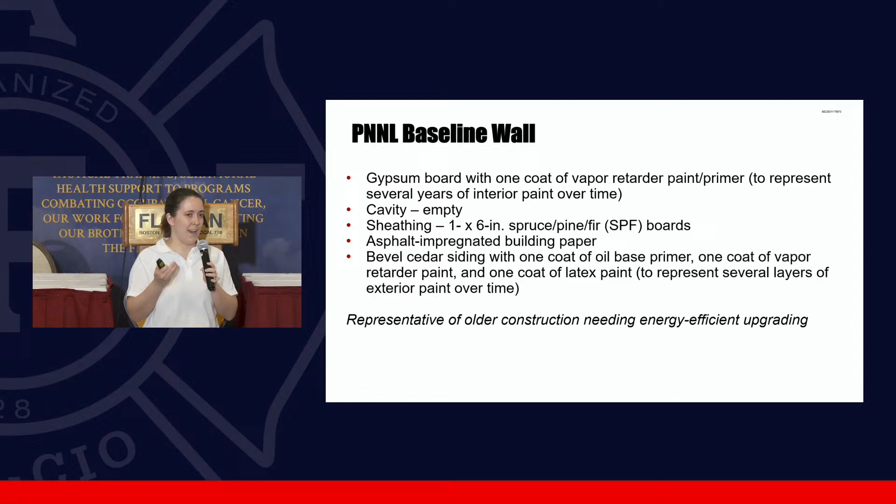And the construction here, we had SPF boards, empty cavity, just gypsum wall board, some cedar siding, because that's what's representative of homes pre-energy codes.

Something that they had mentioned to us that they didn't factor into their considerations is the siding material, because a lot of the energy efficient properties of a wall assembly have more to do with the layering than it does the exterior. However, in terms of fire propagation, that's something we want to look at. So you'll see 3 different types of cladding. We used wood composite, vinyl, and fiber cement.

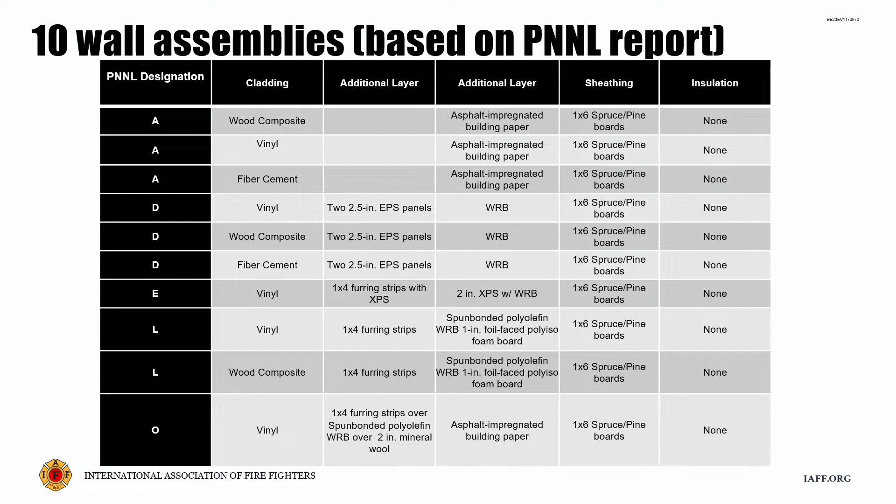So we conducted 11 tests, 10 different wall assemblies. All of them used this base wall. And this base wall is entirely pulled from the PNNL base wall in that report.

So some of the comments that we've got in the past is, this doesn't represent construction, current day construction. No, it was never intended to.

So the base wall here that we applied the layers of the different wall assemblies, we had the spruce pine boards, the single layer of gypsum board on the inside, and we attached an A-frame to the side so that we could move around the wall samples for testing.

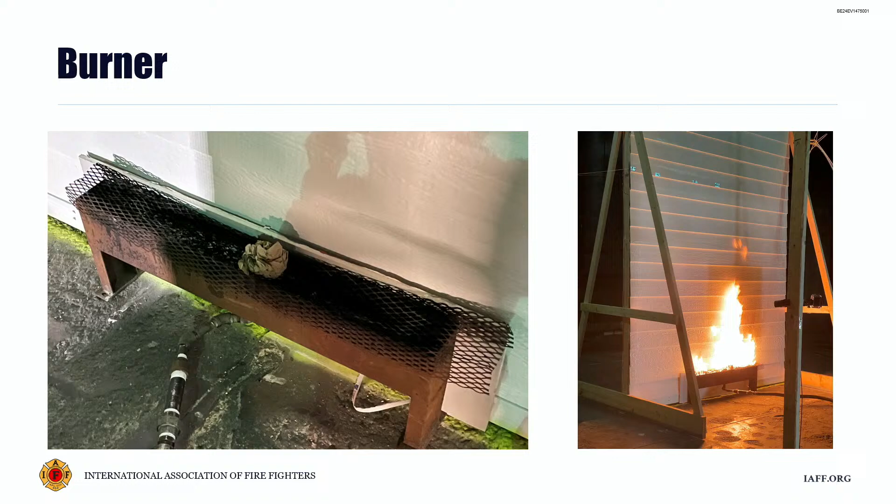The burner that we used during this testing is similar to, the same as the one in the attic fire testing. It was also used in 2707. So it's a simple line burner, propane fed. The burner is placed up against the wall assembly, but a gap was left between the wall assembly and the burner so that the sample would not be ignited by the hot metal.

So the first test we did, we tried to pick something we thought would be middle of the road in terms of fire performance. We want to hone in a little more on the ignition fire size. So based on the earlier UL research, they looked at several different fire sizes, determined that 75 kilowatts they thought was best, but they hadn't gone lower than that.

Ultimately, when we take this into consideration for test method development, what we're looking for is an ignition source and a test method that allows us to differentiate performance between different sets of samples. So we didn't want an ignition fire that was so aggressive it burned up every single wall assembly, but we don't want something so easy that every single wall assembly would pass this method. So based on the earlier research, we settled on 75 kilowatts.

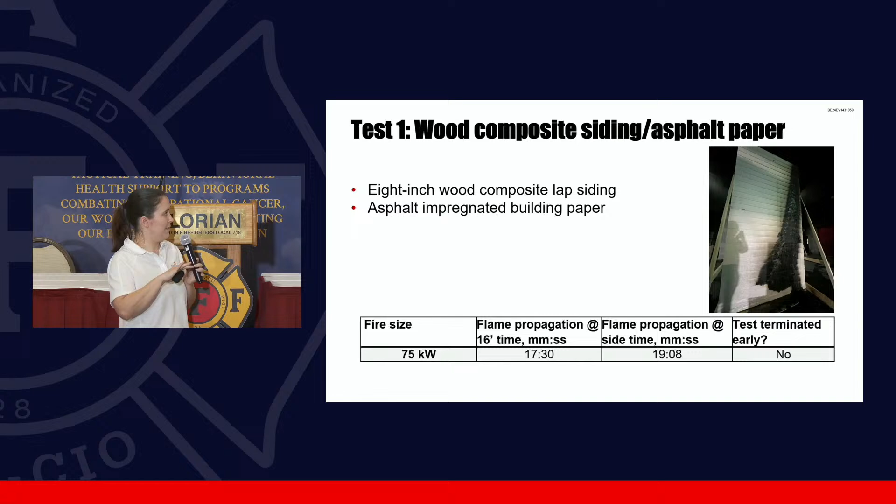We did one test with wood composite siding against the asphalt paper, and then a second one with a 50 kilowatt ignition source. So after the course of about 20 minutes, we saw the slow progression up to the top of the wall sample. In terms of what we're looking at for metrics as part of the new standard test method is time to the top, time to the sides of the samples. And this was a pretty good result. We're pretty happy with this.

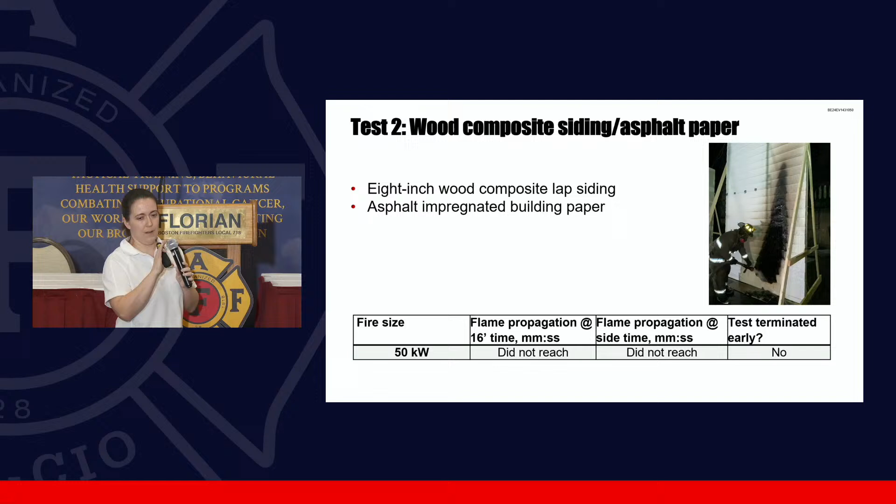The second one, after 20 minutes of exposure, we got not quite halfway up the wall, so it didn't quite have enough oomph to show us what we needed to see from that sample. So for the remainder of the testing that I'm going to show you, we used the 75 kilowatt ignition fire.

So I mentioned before the different cladding types. So the first couple tests here, we did the wood composite, we did vinyl, and we did the fiber cement board.

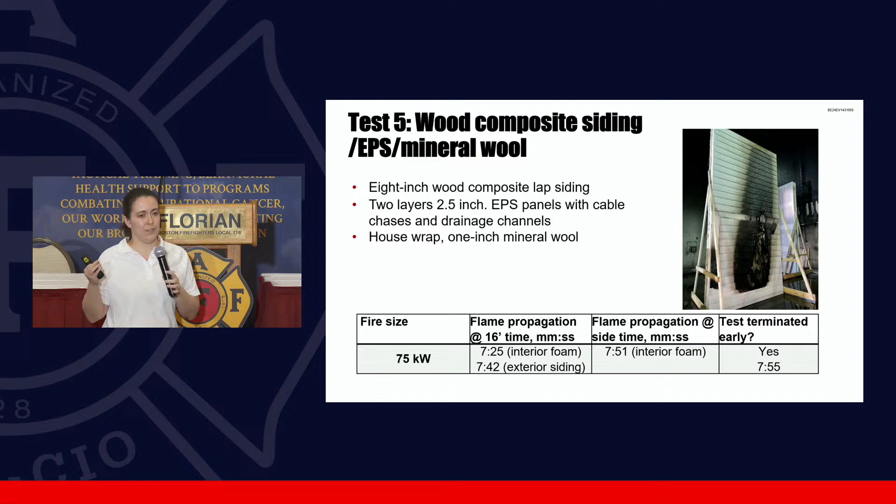Moving on, we did the same cladding again with expanded polystyrene behind the cladding. There are 2 layers of 2.5-inch EPS panels. This particular panel also had openings through the insulation for installing cables, and that becomes important a little later. Behind that was a layer of mineral wool.

Over the course, we got about 8 minutes in before it reaches the top of the sample, and we've gotten what we needed out of the sample.

Repeating it again with the vinyl siding, we see it quickly races up the top. At 4.5 minutes, we've burned away most of the sample.

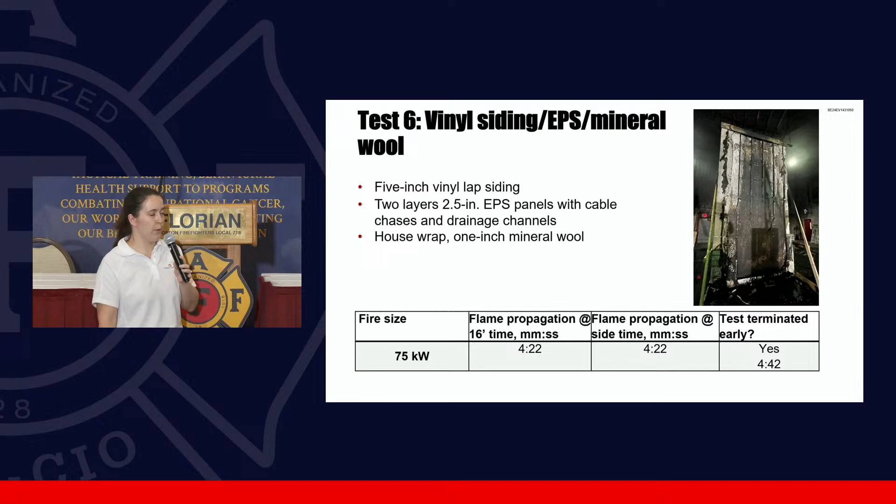Fiber cement siding. This test was an interesting case because, like previously, 20 minutes of exposure, there's no flame attachment, it doesn't break through the siding, we get a little bit of staining, no big deal.

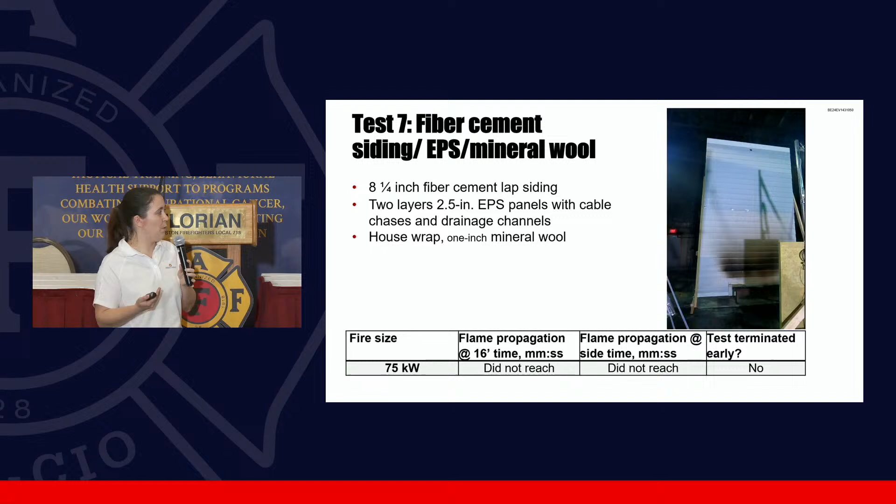For our own purposes, to see what would happen if there was a penetration, we did something a little extreme - we removed a few of the panels, to see what would happen if there's direct flame exposure to the foam, whether it would attach. I'll let this run for a little bit.

So we start to see the flame attached to what's left of the foam in the wall assembly, and it starts eating out the cavities in the wall.

As time goes on, we reach the top of the wall assembly solely from the interior of that wall assembly. So right now that fire is gutting the interior.

When I show you this sample, keep in mind that it was assembled by a group of people that prepare test samples - meticulously assembled, with the siding properly layered and installed as it's supposed to be. So something to keep in mind here is we can have this excellent shell protector for a wall assembly, but something as stupid as cutting a hole out for an electrical outlet might be enough for a fire to penetrate that protective shell and eat out the interior.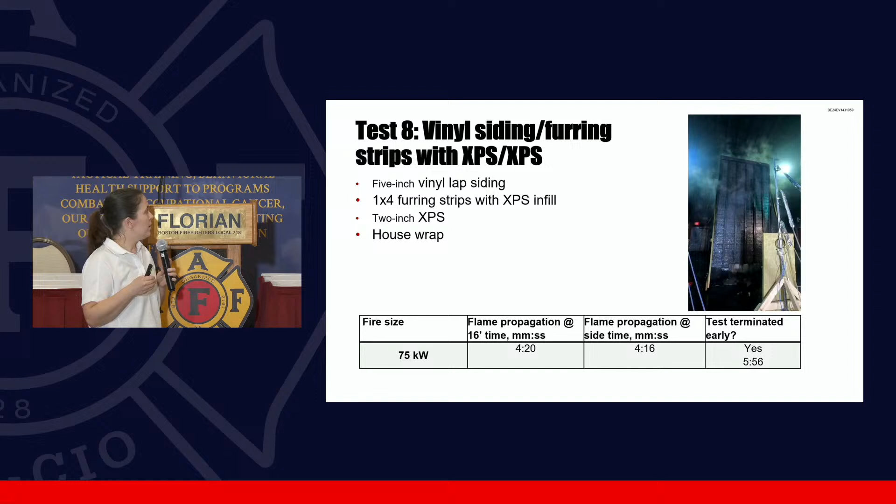So again, we ignite the fire, let it go - 4 minutes, and it's raced up to the top of the sample.

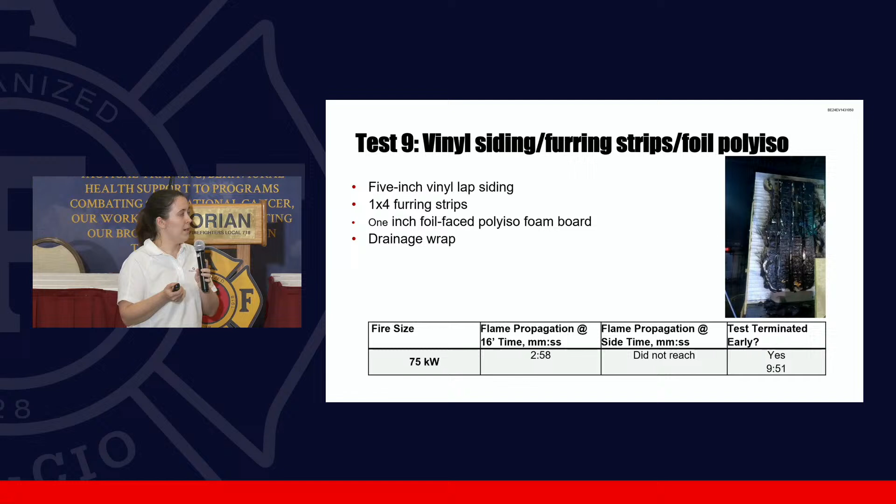In this one, we wanted to take a look at the foil-faced polyiso foam board. In this case, there was no infill between the furring strips.

So what we saw is once the fire is ignited, it quickly kind of moved up this channel that's created by the furring strips. In this case, we had the vinyl siding, and you can see it fall away on the sides there. 2-3 minutes in, that one was done.

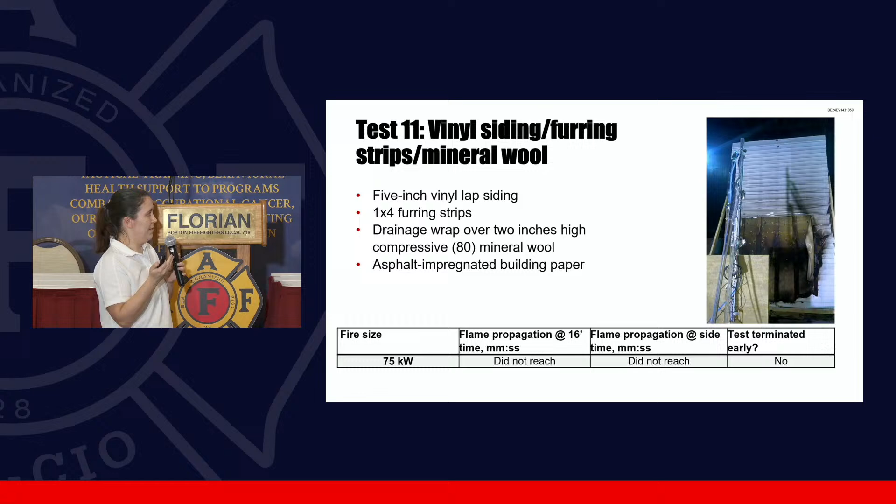After this 20-minute exposure, we did not get any flame attachment, and it was just some light staining.

What this really shows us is that the performance of that exterior siding alone isn't the only determining factor of the fire performance.

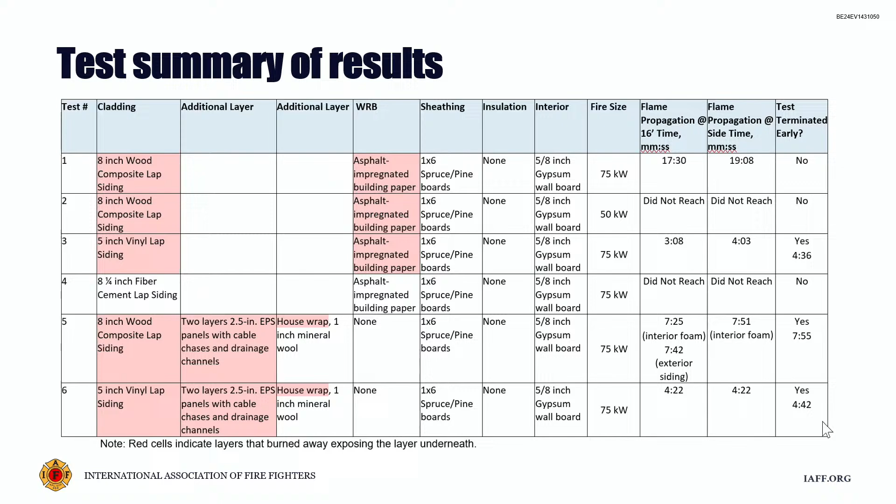So this is just a high-level summary of the tests we did. The red indicates how far the fire made it into the wall assembly. The first several stopped at the spruce pine boards. Number 4 was the cement fiber board where we didn't see attachment. The next couple stopped at the mineral wool layer, and it continues down.

One thing I want to cover, going through this test series, is the heat release rate of these samples. This plot gives you a comparison of the highest burning material versus the lowest burning material.

So the fiber cement over asphalt paper, we were hovering at about 100 kilowatts as the peak heat release rate. The vinyl over the expanded polystyrene and the mineral wool peaked at about 6 megawatts. So 6,000 kilowatts versus 100 kilowatts - that's the difference in performance here. And if that doesn't really click, 6 megawatts is basically 2 big fluffy sofas fully involved in burning.

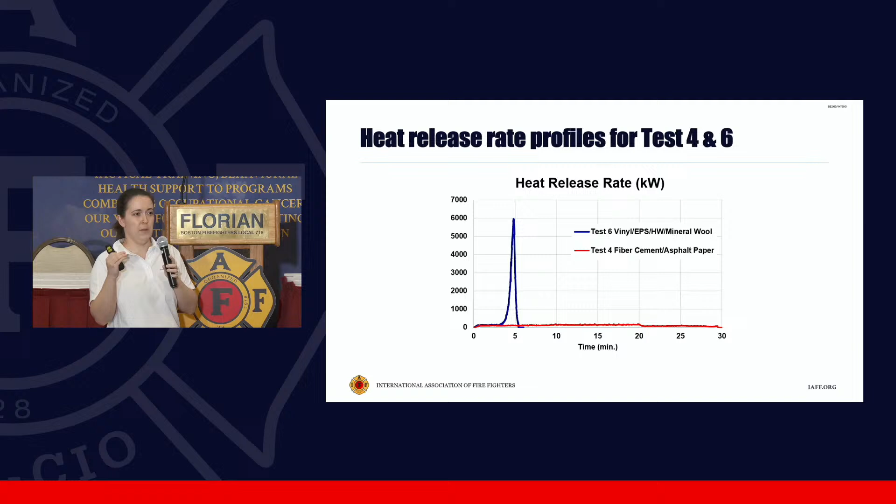Something we also looked at is the heat flux from these test samples. So we put some heat flux gauges to map out the exposure from each of these wall samples. That information gives us the likelihood of ignition of nearby surfaces.

So the closest heat flux gauge was centered 8 feet from the sample. This one I picked out because it was the highest, that 6 megawatt test, just to give you a sense of what it can do.

The vinyl expanded polystyrene over the mineral wool, we got a peak heat flux of a little under 25 kilowatts per meter squared. For context, I pulled this chart from NIST. The exposure you get from the sun on any given day is about 1 kilowatt per meter squared. We start to get uncomfortable at about 3 to 5, and 20 is generally accepted as the onset of flashover.

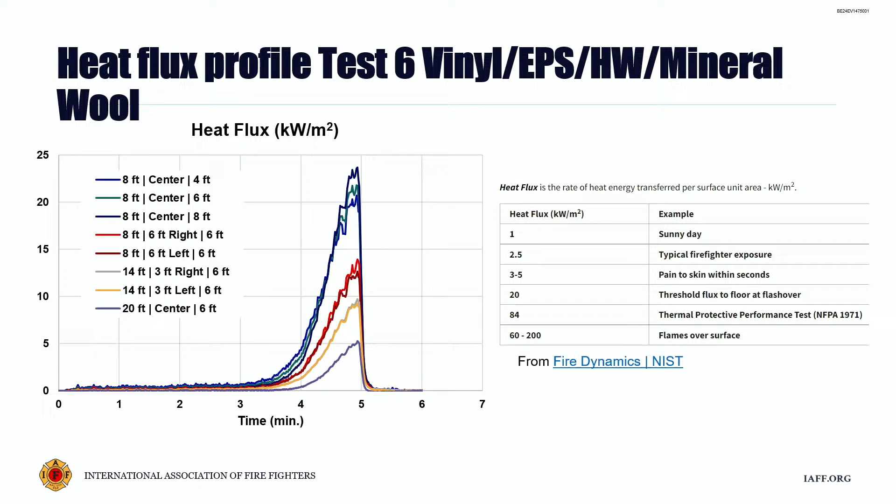So a quick summary of the findings of the research. Both the external siding and the interior wall materials can impact the wall performance, and that's why this new test method is so important. The performance of any one material can be jeopardized by other nearby materials.

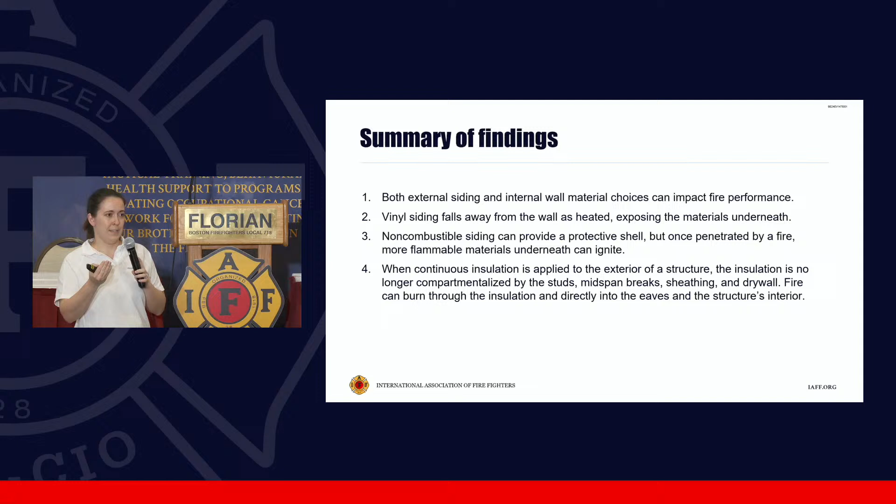In this particular series, we saw the vinyl siding fall away from the wall sample as it was heated. What that means is an interior layer that's not intended to be exposed is now exposed. Thirdly, non-combustible siding can provide a protective shell, but as we saw in the video earlier, weaknesses in how the siding is attached - if it's not attached correctly, if someone knocks a piece off, you cut into that wall material - that protective shell now exposes potentially a weaker material underneath.

Number 4: we're also seeing this idea of continuous insulation on residential structures. Typically you would see that done in commercial high-rises and things like that. The difference here is that has to go through the NFPA 285 test, whereas in the residential sphere that doesn't have to happen. But the problem with continuous insulation is then you lose the compartmentation that exists in wall cavities - your gypsum wallboard, your OSB, your breaks in the stud, all of those things that would compartmentalize insulation aren't there.

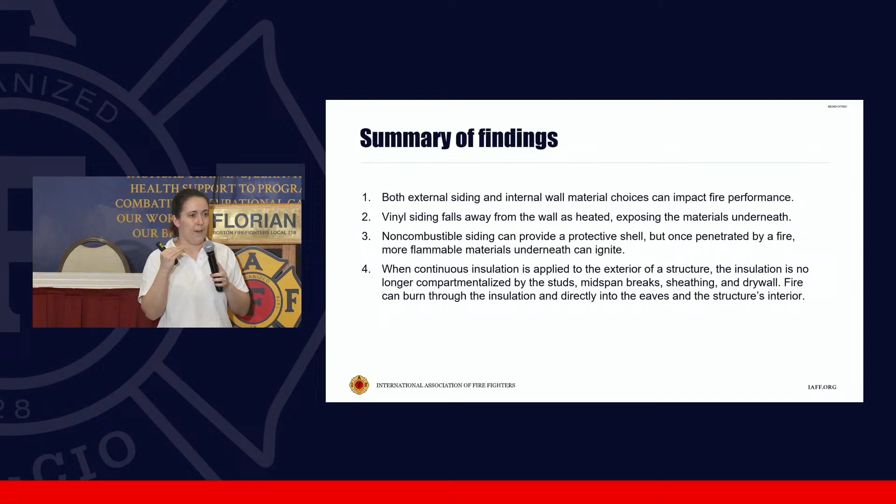And that's the potential for a fire moving quite easily up into an attic space.

Some of the features that we saw in the technologies from the PNNL report also incorporated features to allow more airflow in the wall assembly. That's great for reducing the mold, the mildew, the humidity. The downside of that, and something that has to be factored in here, is that's also what provides oxygen to fires. So we might be trading one benefit for another.

The next point I wanted to cover is the heat flux, measured from 8 feet from the wall. Just to reiterate again, this is potential for structure to structure spread. And lastly, that kind of rolls into the importance of having the new ASTM method, to screen some of these potential products out from the market.

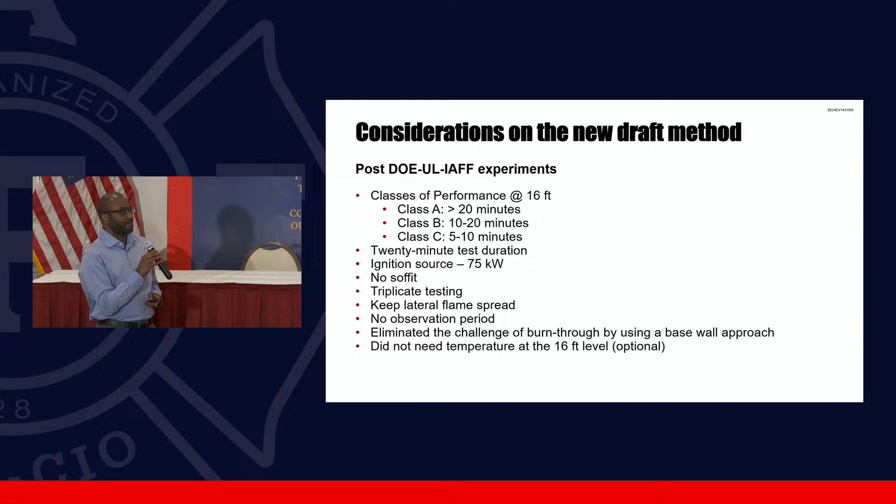So we looked at it and we said if it's between 5 and 10 minutes, it would get a Class C. If it's between 10 to 20 minutes to the top of the structure, it would be a Class B. And then if it does survive and gets to the top after 20 minutes, then it would be a Class A performing type of product. So the group did not want to have just a straight pass or fail, but they wanted to have different classes of performance. And that's kind of where this group is headed.

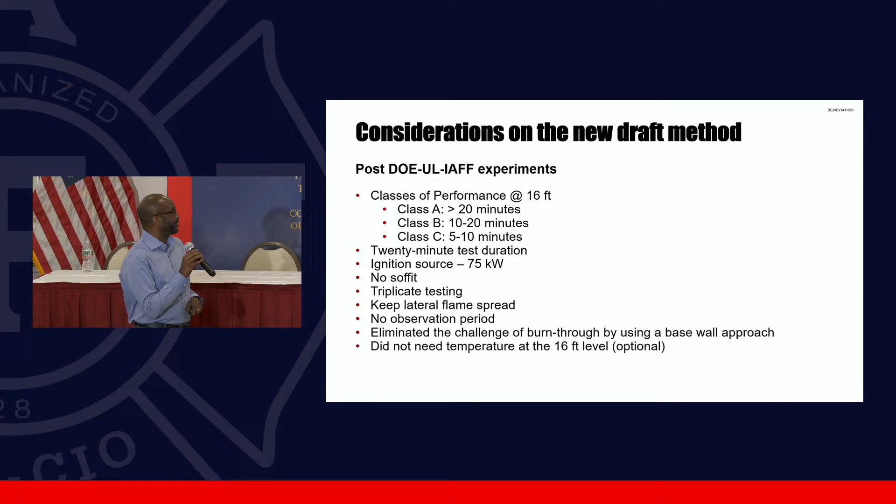We stayed with the 20-minute test duration. As Kelly mentioned, we showed through our data that we wanted to stay with the 75 kilowatt ignition source, no soffit, triplicate testing. We're keeping the lateral flame spread in there, so we don't want it to spread laterally. We're not going to have an observation period. And so these are some of the criteria that went into the ballot items.

So when they asked for someone to lead this task, everybody else took 2 steps backwards, and I was standing there. So I'm the leader of this task group, and so I'm kind of taking some of the heat, if you will, for some of the negatives. At ASTM, it's a big voting pool. It's well over 100 people that vote on these standards. So unlike NFPA that has maybe a slightly lesser group that form their technical committees, ASTM has well over 100 people voting on the standard.

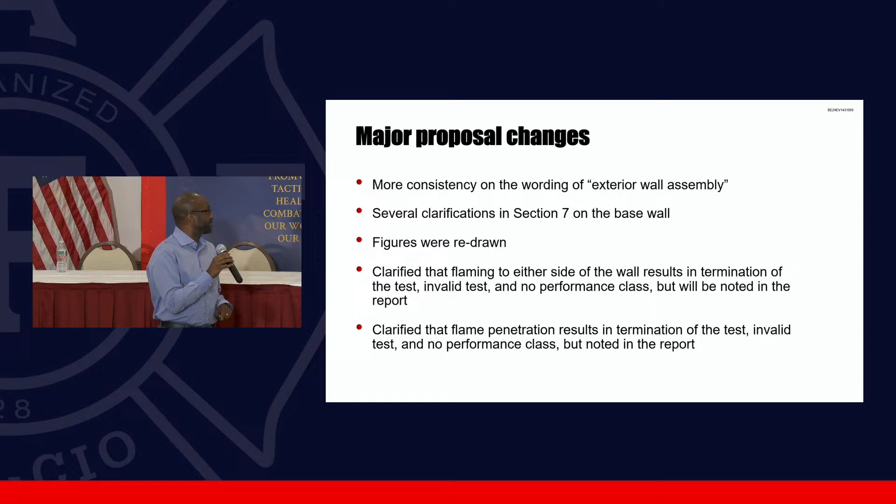So we did pull some negatives. And the first time I had the negatives, it was well over 20 negatives, so we had a lot to deal with. We made some changes for consistency of the word exterior wall. We made many changes. Kelly did a total rewrite of Section 7 that talked about the base wall, so thank you for that, Kelly. We redrew the figures. We made special notes about flaming to the sides of the wall and termination of the test period.

They didn't like just A, B, C because it confuses with other class A, B, and C that exist in the flame protection, fire protection world. So we called it EW for exterior wall A, B, and C. And we made other small changes to the commentary section as well.

So I went out for a reballot. And the reballot, we still pull some negatives, but now we're actually into helpful negatives that are helping us to hone this standard. And our next meeting will be in June in Philadelphia. And so we're hoping to make even more progress on the standard in June. So yeah, just kind of showing you how this works, where we had the idea at ASTM, we actually did the work with DOE, it informed us. Now we're back to the ASTM group trying to hone that standard and make improvements, but it is moving forward. So I just wanted to share that with the group here.

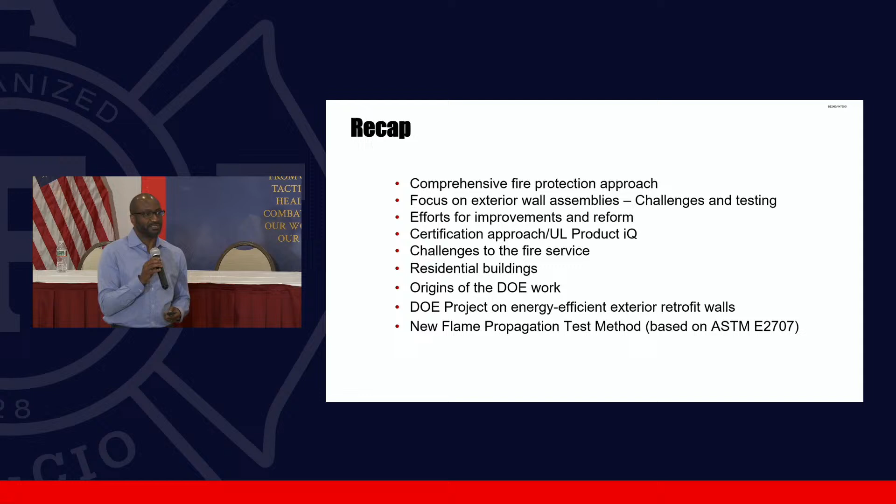So we had a chance to talk about the comprehensive fire protection approach and the challenges on exterior walls for commercial buildings. Shared with you some improvements and reforms that happened because of the Grenfell Tower and many other large-scale commercial fires. I also showed you how to look at Product iQ to find where some of those certified systems are. Then Sean took us through the residential building work and the DOE work and how these fires really are happening out there in the real world. Kelly did a great job taking you through the DOE project and the 11 tests that we did, and taking us into the development of this new standard. Thank you for allowing us to share that with you.

And I think with that, Sean, we're going to roll right into some panel discussion, right? Okay, good. All right, okay.

We're in the home stretch, folks. If you need cookies, there's still a few cookies over there. Take a 5-minute break for cookies. Yes, that's how I bribe Chief Healy up here.

So again, I don't want it to be strictly from me. There was a lot of information, especially technical information, presented in that last session, mine aside. But we have Kelly on the panel with us, we have Dwayne, and we brought a newcomer, Chief George Healy from the FDNY. George, would you like to introduce yourself to the group? Yeah, as Sean mentioned, I'm in the FDNY for 33 years.